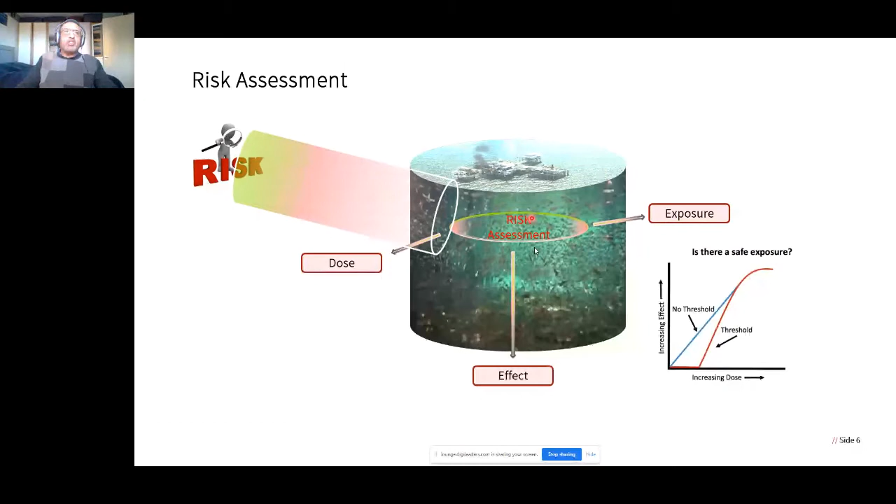The way to do this is to look at it in terms of a classic flow chart, and it applies not just to produced water, but to any risk - you could be talking about monetary or financial risk, the concept is the same. You have your data collection, you have the hazard - what is the hazard we're talking about? What's the exposure? And how do you assess the risk characterization?

For the hazard assessment, we have to identify the hazard - what is the risk source, and then look at the nature of this adverse effect. In terms of exposure, in this context it's the discharge and environmental interaction. Essentially what we're trying to establish is this probability - what is the probability of this risk taking place? To do that, we need to do the risk management, and then that needs to be monitored on a continuous basis. So that's kind of the crux of the risk assessment.

To say right at the outset, we use this concept of PEC-PNEC, a ratio of PEC to PNEC - predicted environmental concentration and predicted no effect concentration. Put simply, PEC is the concentration that's in the field, and PNEC is the concentration that we establish from the toxicity testing in the laboratory. The whole rationale behind this is that there are certain assumptions that we make, and this brings an element of conservatism, some speculation.

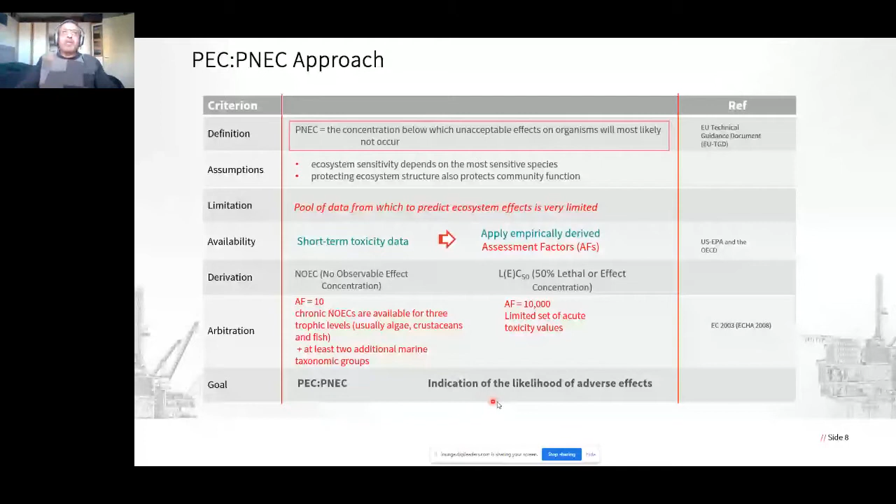The different steps relate to that flow chart I mentioned about hazard. Basically that's the data collection, and then we assess the hazard, and you'll see this when I show you some real examples.

The data collection involves looking at the chemical analysis of the produced water. Operators in the UK continental shelf are required to perform chemical analysis on produced water twice a year. So this is the data we use.

For toxicity, we use different trophic level species - we have microbial assays, algae, and crustaceans. So this is the hierarchy, if you like, and this is the process.

You'll see when I show an example what information we obtain. So we start with the produced water, do the tox testing, use the chemical analysis data, and then do some modeling that will tell us where the toxicity is coming from. And therefore you can have a risk management plan.

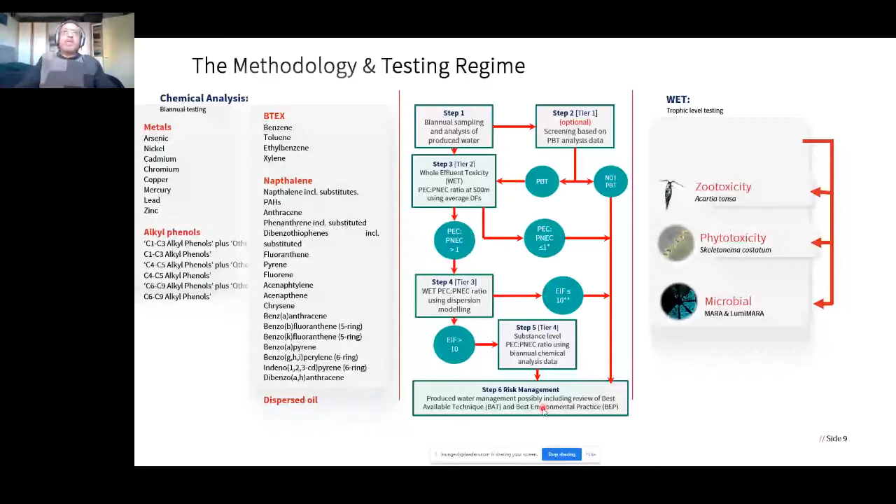From a global perspective, I'm based in the UK, and we're involved in the UK continental shelf, governed by the OSPAR regulations. For example, Norway is one of the other countries involved in this regulatory drive.

Further away you have Australia and the Far East, which have specific regulations. And then off the coast of Africa, for example, you have the Abidjan Convention, which comes into play.

My take-home message here is that there are these different regulations, and if you look at the specific information I've indicated, there are different concepts used. I showed you that flow diagram for how we make the assessment, and if you look at the particular data, you'll see the approach is different. The approach is different, so there is that disparity in terms of the different regulations globally, and that's what I'm trying to say.

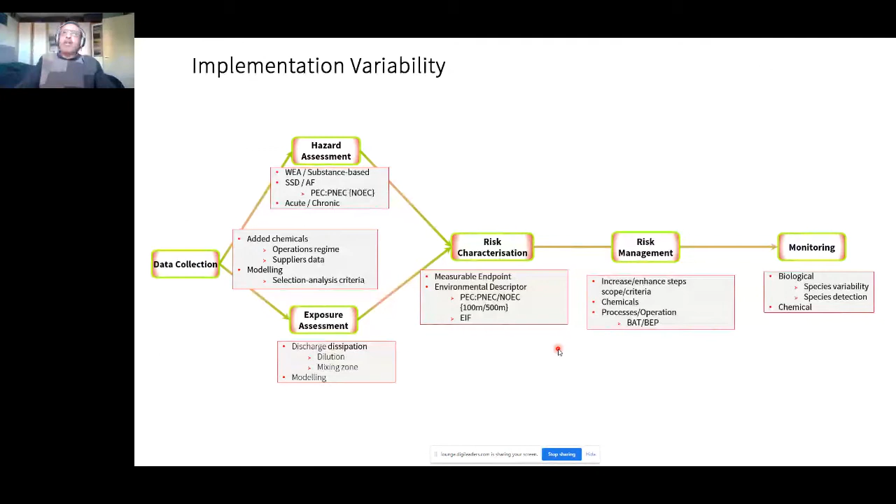The other thing to highlight is that we produce water in the oil and gas sector. The oil and gas regulations I talked about are obviously important, but here we're talking about chemicals. The whole idea of the risk-based approach is to look at the toxicity of chemicals, and you have chemical compliance regulations that are applicable globally, the most prominent being the REACH regulations.

So you have those two sets of regulations, the oil and gas regulations and the specific chemical regulations. The point I'd like to make is that there needs to be harmonization between these, and what you find is that this harmonization is not there at the moment. That's important to bear in mind - it will become more important that we make sure these are harmonized.

In order to carry out the risk-based assessment, certain aspects need to be in place regarding infrastructure. We have the regulations, and the regulator has to make sure these are adhered to - in most cases it's the Environment Agency in that region that takes care of that. You have the operators, the oil companies, who have to comply and verify and carry this out, and this is very much an international practice.

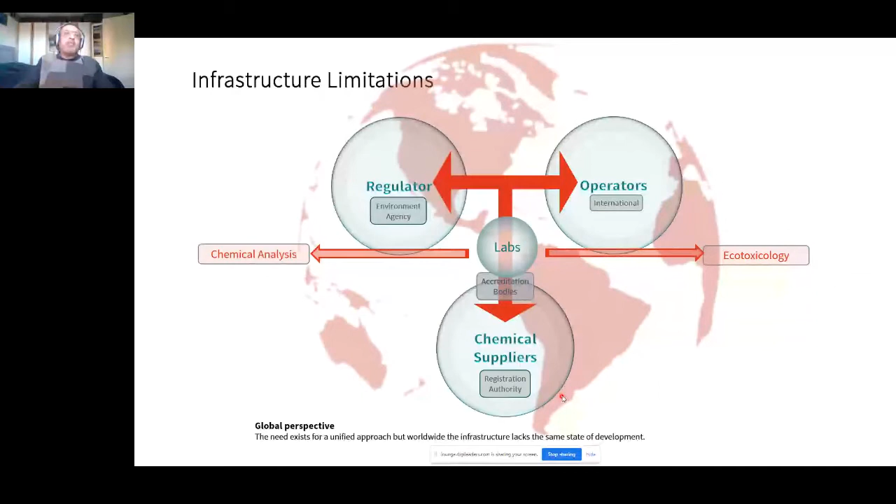If you look at the risk-based approach in terms of chronological development, this is very recent - that's the important message I'm trying to establish. Regulation came into play back in the 1960s, and it was quite basic - just looking at oil and gas discharge, end-of-pipe regulations. Over the years these have been modified and developed, mostly in the US and European regions, and you have specific OSPAR regulations that came into play.

There was more development as we see, as it progressed, for example, as in Nigeria. So it's been progressive, but it's very recent. That's kind of the message.

If you look at this risk-based approach, this has only come about in the first decade of the current century. And if you look at the UK RBA trial I mentioned, this only started back in 2012. In terms of the first cycle, we've finished the first phase, now we're in the interim phase, and 2023 is where the next phase will start.

There are other countries where this is now being practiced. So this risk-based approach is globally gathering momentum, but it's recent, and I guess it needs time to actually be practiced.

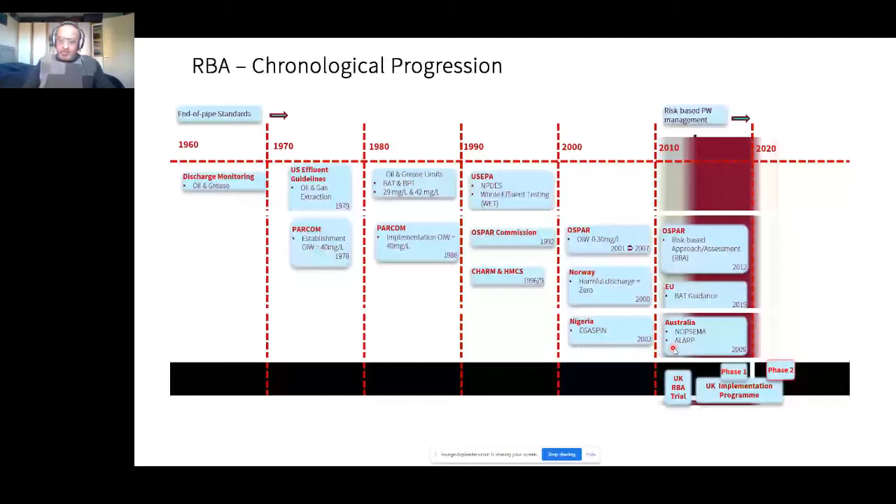We were commissioned by IOGP, the International Association of Oil and Gas Producers, to look at this globally in terms of the disparity I mentioned, and how you actually address this RBA. So we were involved in producing this guidance document.

It's in the public domain, report 633. Please do have a look at it. It's very important and useful, and we put a lot of information together about the disparity, but also how you can actually carry this out. So it goes a long way towards global unification.

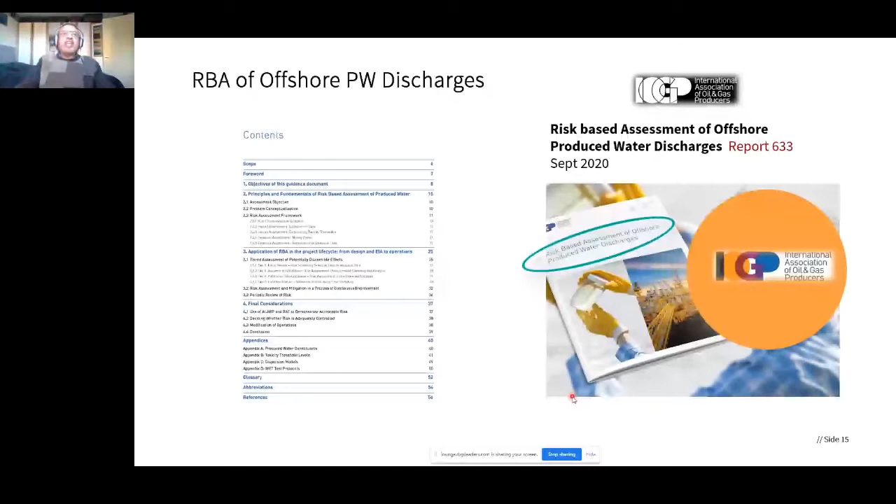I did say at the outset, examples in terms of how we actually do this, that stepwise process I mentioned: the modeling we do, the chemical analysis, the tox testing, the modeling. This example just shows you the outcome.

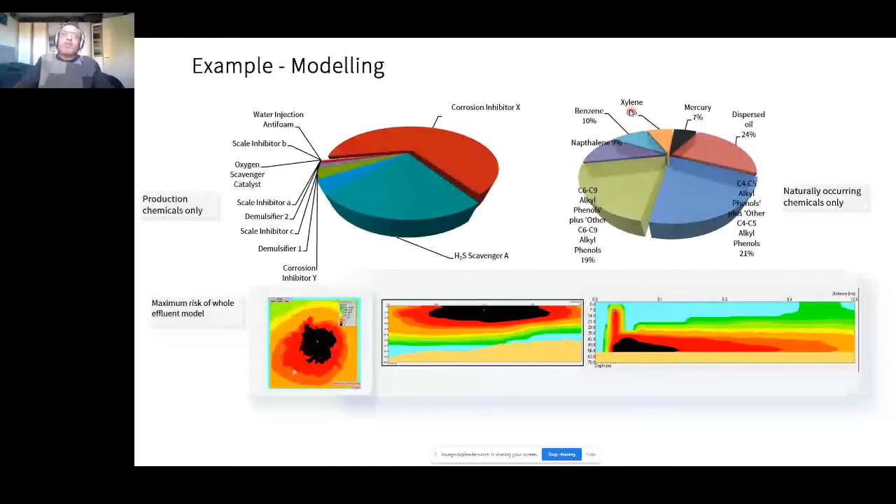What we can also do is look at the different chemicals present in the produced water. From the modeling, we can actually home in on where the toxicity is coming from. In this particular case study, a corrosion inhibitor was contributing the most to the toxicity, and we also had an H2S scavenger contributing. We can also look at naturally occurring chemicals, which come from the formation water below the seabed, and see which particular chemical is coming from those naturally occurring substances.

Hopefully that gives you an idea of the concept and what we actually obtain. This just shows it's a process, a dynamic process. On the UK continental shelf, we learned from lessons learned and modified the approach.

The two key parameters used in the assessment factor for the earlier steps I mentioned are the amount of produced water discharged, and to what depth you're discharging. We use these different assessment factors that we've derived. This was modified so that we introduced some more interim discharge volumes, so it gives a better representation.

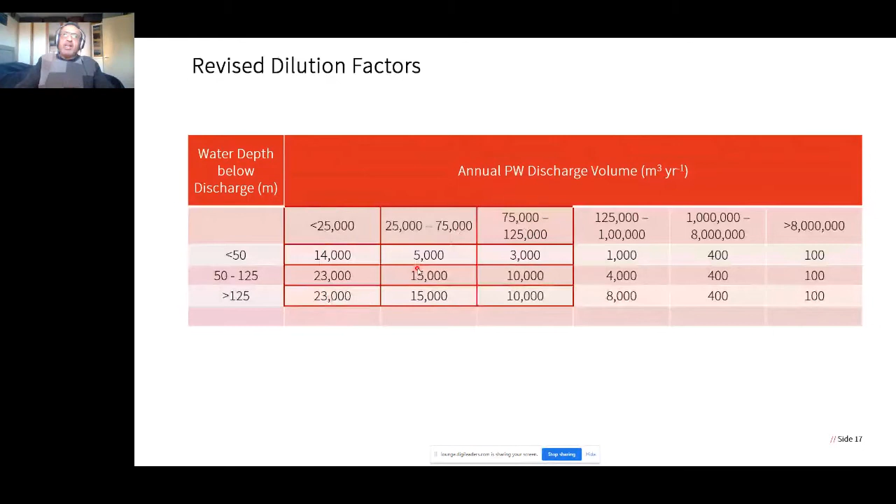The other thing we were able to do was look at the actual modeling that was done. For the most part, we've used this DREAM model, which is a proprietary model. There are other models available like CORMIX, MIKE, and development of other models that can be used to do this, to make it more accessible globally.

The other point to make is about different organisms and different tests that we use. You can see here that different organisms have different sensitivity to different produced water. So it's important that you actually use different test species. This is quite important from an ecotoxicological perspective.

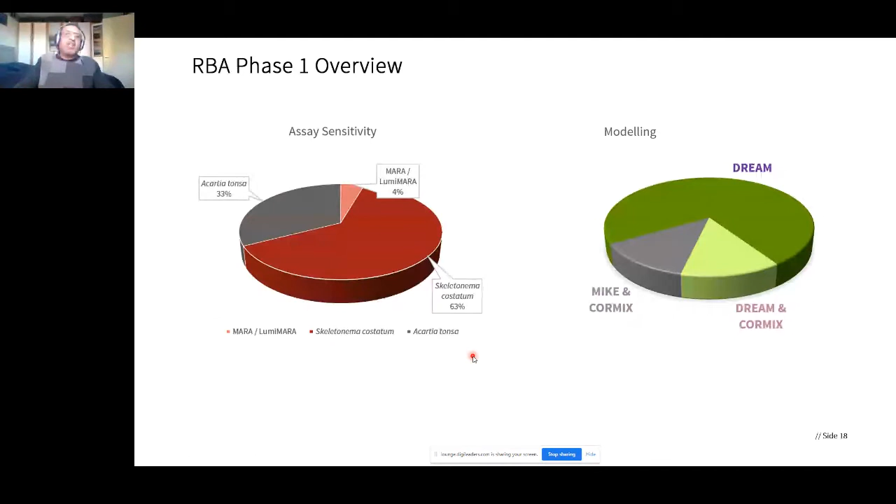One thing to mention is that when you look at production chemicals, they are actually made up of different components, and the amount of information available is very specific, so we end up making assumptions. For example, a production chemical will be made up of different components, and the information might indicate that one particular component is very toxic, but this component might only be a small percentage of the whole. Because of limited data available, we end up treating the whole product as though it's that single toxic component, and that creates an artificial impact.

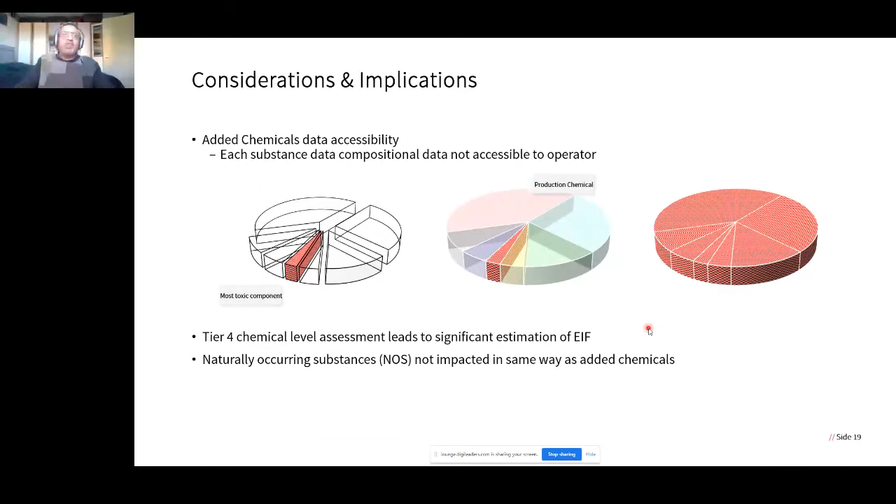This is good science, but it's not an exact science, and it's a little bit speculative. The other element of speculation is that when you use chemicals through the process, they actually partition between different phases - you have your oil phase, water phase, and gas phase. So those chemicals end up in different phases, but we make the assumption that all the chemical ends up in the produced water discharge. That will not actually be the case, so that's another assumption we make.

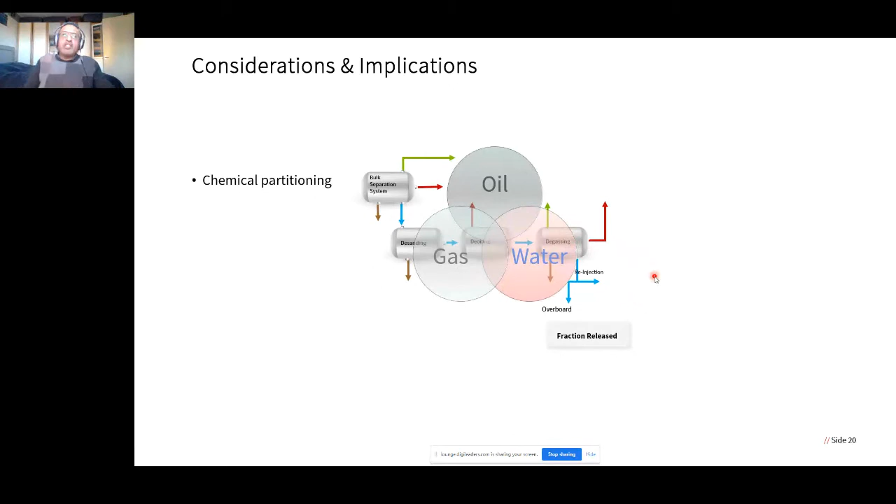We are looking into this through a working group, to see where the partition takes place and try to modify the approach. The other area where we want to improve the speculative aspect is to use different species and different types of tests, so we can reduce the assessment factor.

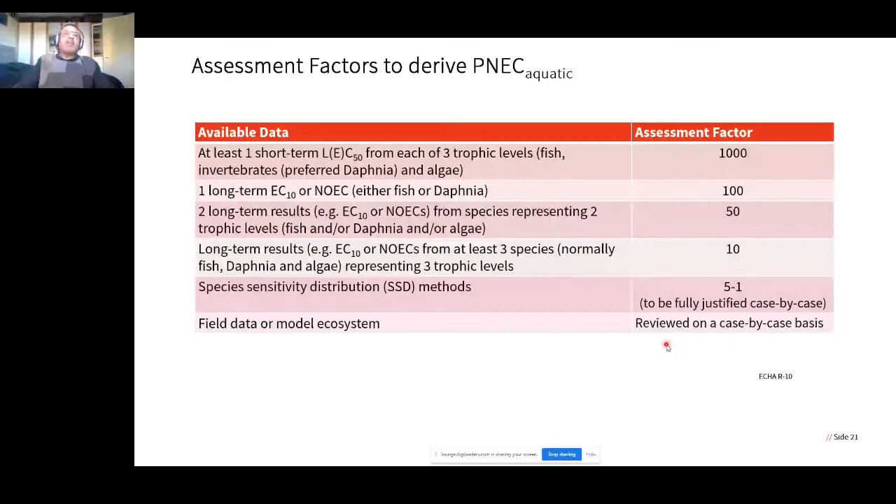We're advocating the use of chronic testing, and this is something we're actively looking at already. We're entering the second phase, where we'll be using chronic testing - these are more elaborate tests that will give us a better picture of the outcome. In the second phase for the UK, we have all these different operators, and these are all the different installations that in the coming years will have to carry out the RBA.

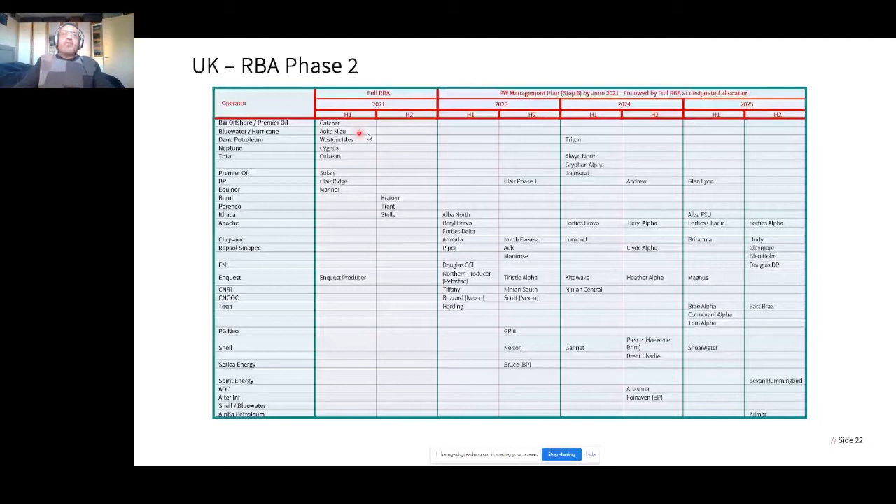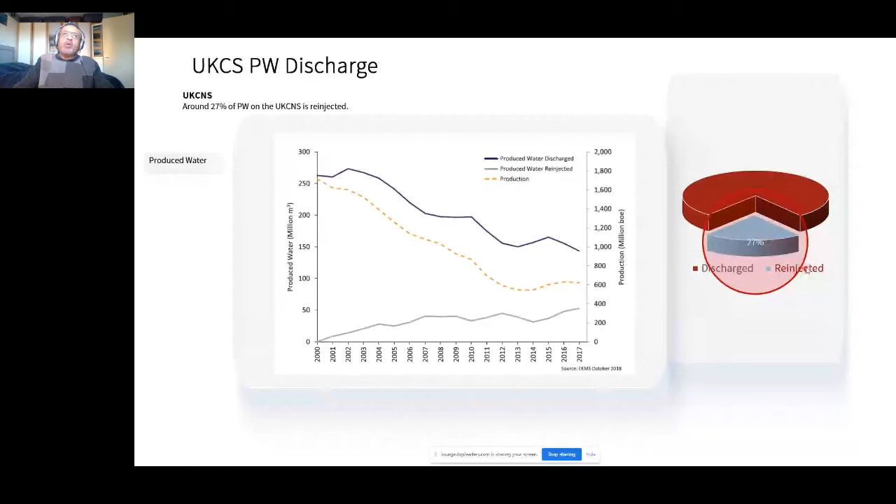The reason I say that is, in a study carried out in Norway, if you look at solutions to reduce the EIF and toxicity, there are different avenues - you might substitute the chemicals, or you might use reinjection. But the cost of reinjection for a lot of these different installations was pretty high - you're talking about millions, six-figure sums. So what I'm saying is that injection is not necessarily the answer.

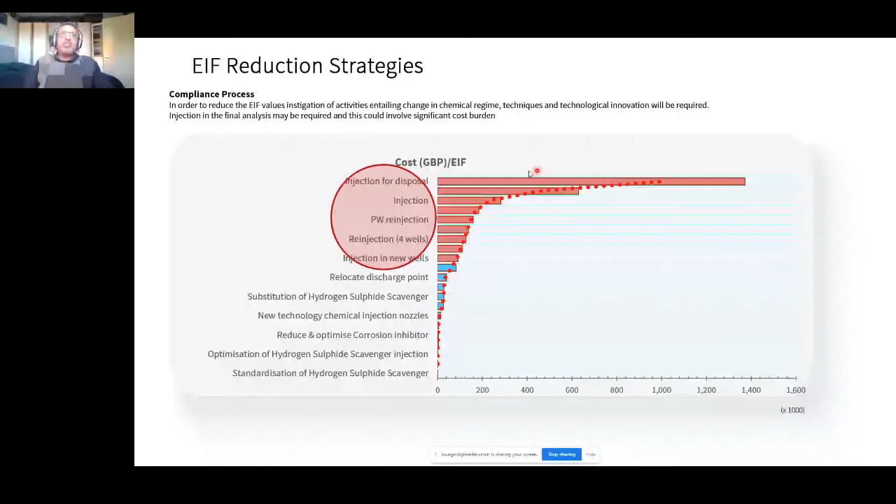You do need to do something about the toxicity of produced water, and although produced water discharge is going down, what we really need to do is look at what's actually in the produced water. You have different risk components - low risk, medium risk, and high risk components. What the regulator needs to do is make sure that it's these high risk components that are less and less discharged. So that is the recipe really in terms of reducing the impact.

So just to end this presentation, a final summary: you need to review the methodology used in the whole RBA process. I mentioned different tests - the assessment factor using chronic testing, chemical substitution, using chemicals which are less harmful to the environment, and improved water management strategies. Here we can use BAT, best available techniques, and best environmental practices. As I mentioned, there is tremendous disparity globally, so you need a unified approach globally.

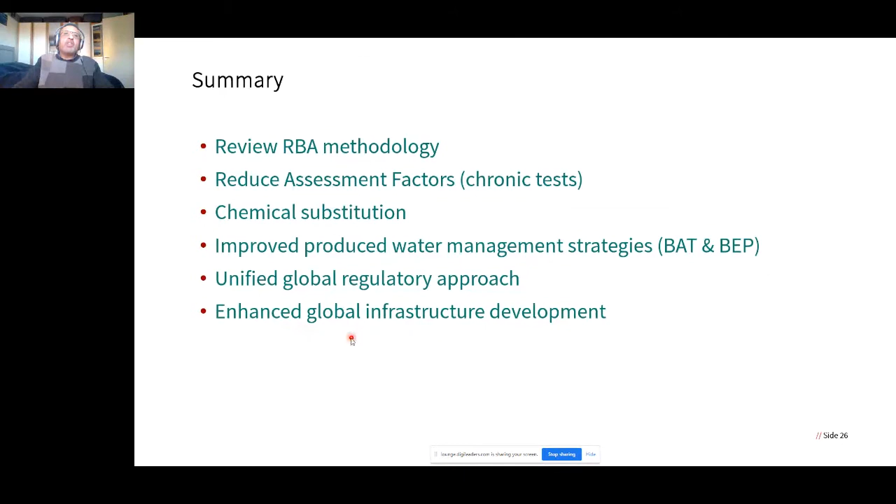And then, as I mentioned, the infrastructure in some places just does not exist. So we need to make sure that globally we address this. We have a unified global approach to actually improving the infrastructure. And that's the end of my slide.

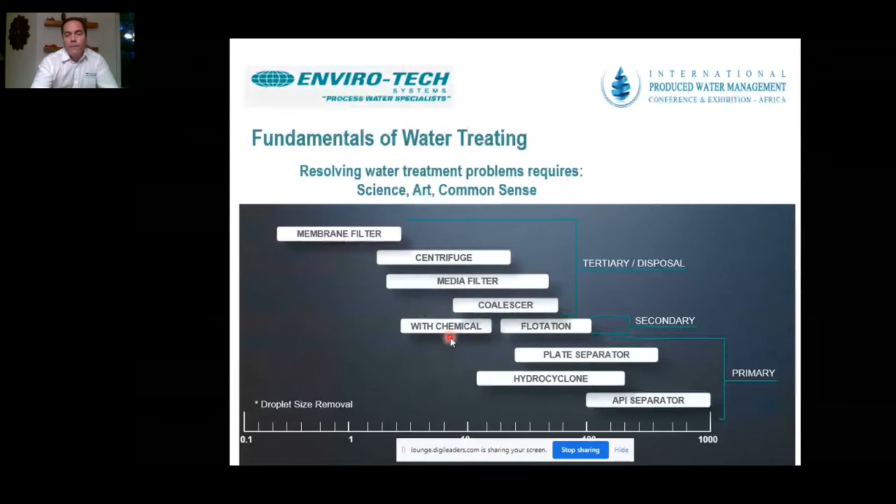Filters can also be used as an assurance if you have an upset condition where treatment was not done properly in the first or second stage. You can always use the media filter to give a performance guarantee to the customer before you discharge overboard or reuse.

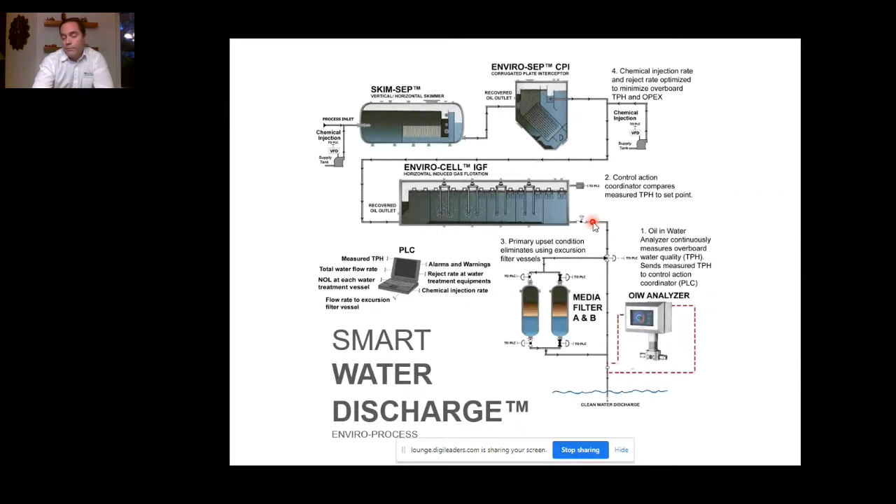On this slide, I'm showing the oil in water analyzer installed at the end of the treatment package, but we can also install them at various stages of the produced water treatment package to confirm good performance of the equipment. We can install one downstream of the skimmer, or a couple of analyzers in front of and downstream of the IGF. So all projects are a bit different, and customers sometimes require a better understanding of their process.

These analyzers complement very well the equipment we provide customers at Enviro-Tech, regardless of whether it's first stage or second stage treatment. They come in various styles - here I've got a probe style analyzer on the left, or a side stream analyzer on the right.

If you have a new installation or want a better, more accurate inline measurement, the probe analyzer may be best. If you don't have the flexibility and your existing installation cannot be adapted with a probe, we can also provide the side stream analyzer, shown on the right.

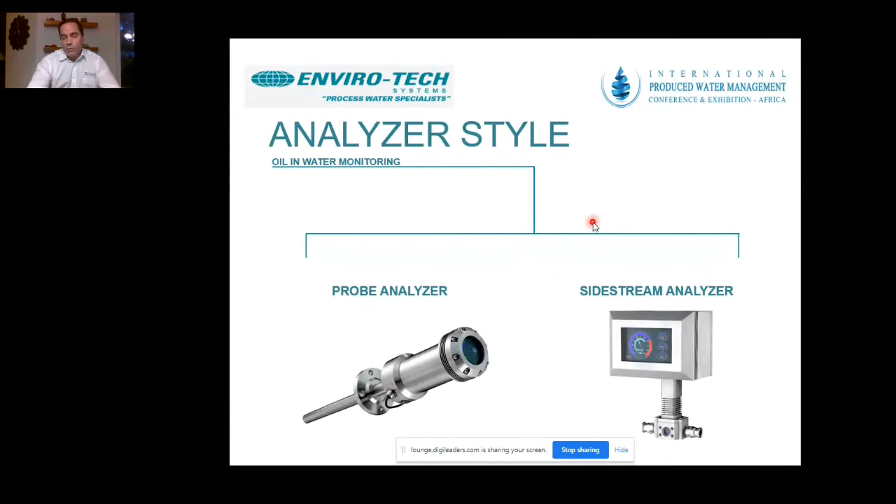This is useful for the operator to make sure everything's okay, use it in his lab, and correlate with the other inline results.

Over the years and decades, oil in water analyzers have evolved quite a bit. They are much more reliable, can keep themselves clean, and are meant to operate in a harsh environment like we have in the oil and gas industry, offshore and onshore.

These equipment also have very high performance. They can give you very accurate measurement and real-time information with readings every second, so you have real-time information coming to the DCS or to the customer's control room.

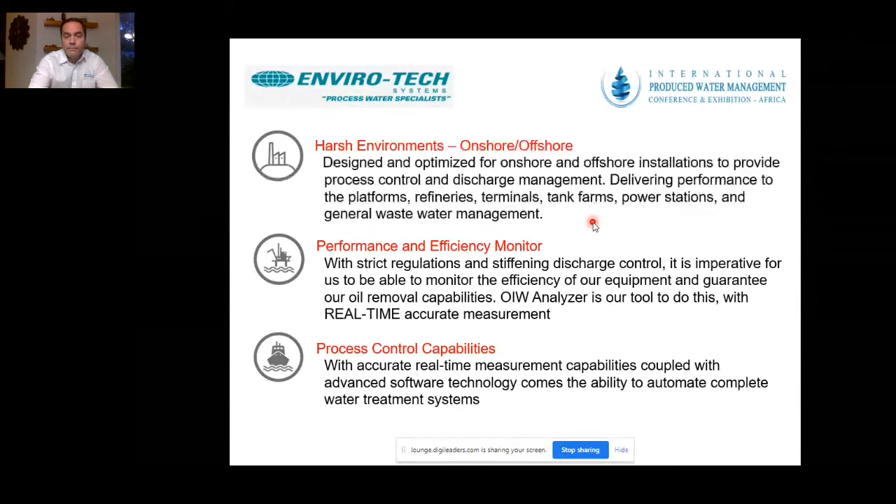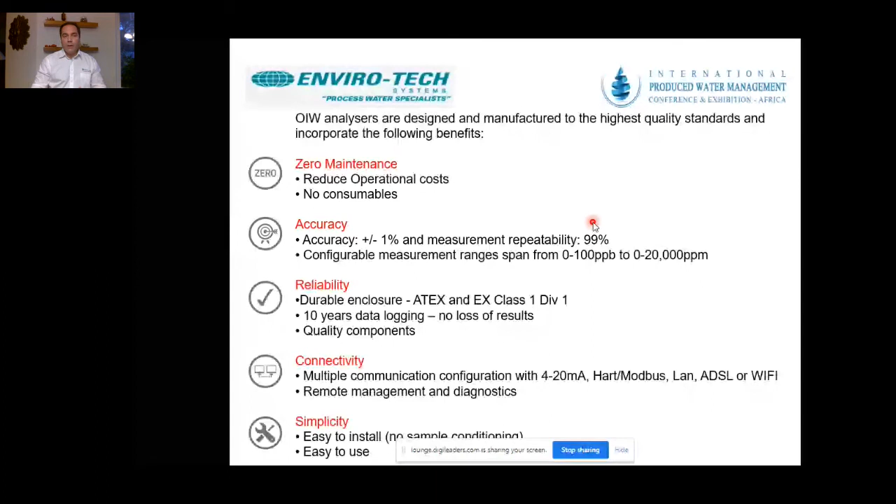These analyzers that we have are robust. They can operate on their own without any assistance, and they can also clean themselves - that's why I'm showing here zero maintenance or very little maintenance. Operators don't need to clean these analyzers constantly to get the accurate readings they need.

Accuracy is very accurate, within plus or minus 1% of the measurable range. Very reliable - we have explosion-proof analyzers if required. It also has various connectivity possibilities with the customer's DCS system: 4-20 milliamp, HART protocol or Modbus protocol, and also Wi-Fi and Ethernet.

Nowadays, these analyzers are really easy to operate. There's very little intervention - once it's commissioned, running, and calibrated, it will keep reading properly with minor tweaks if required when we correlate with the lab, but they clean themselves and require very little attention.

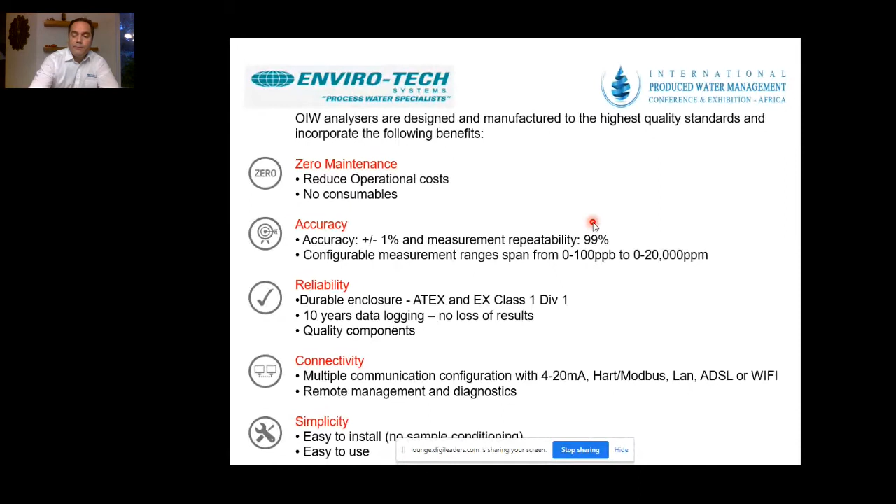The analyzers we provide have various technology that has evolved through the decades: ultrasonic cleaning device, fluorescence or laser-induced fluorescence technology, video microscopy if required for further analysis if the customer is more interested in water analysis instead of just the ppm level, and also spectrometry if you want to recognize different types of oils introduced in your produced water if there's interference with chemicals. Using the spectrometer allows you to avoid some of the challenges of using laser-induced fluorescence.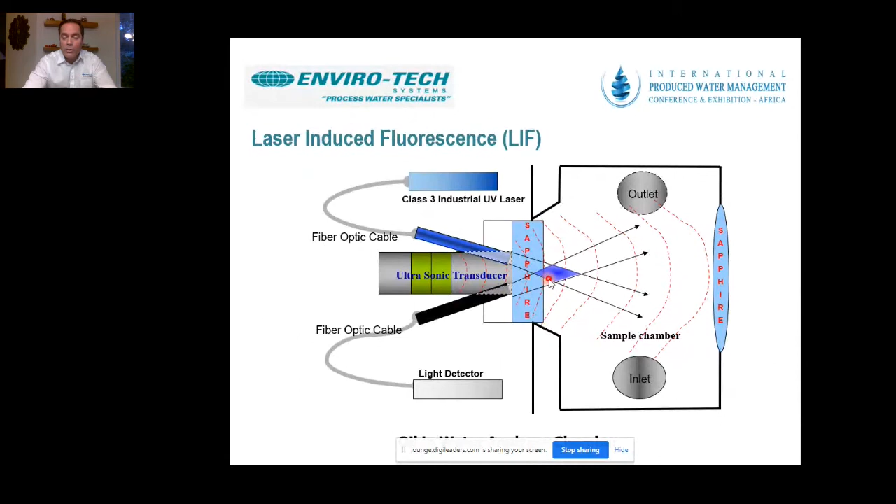So this is basically the technology of laser-induced fluorescence. You use a specific light source, like a laser or UV light. You excite the hydrocarbons, and the measurement of that fluorescence is then converted into a ppm, making sure that we did a proper calibration. That is an important step to have accurate measurement, before you commission the analyzer.

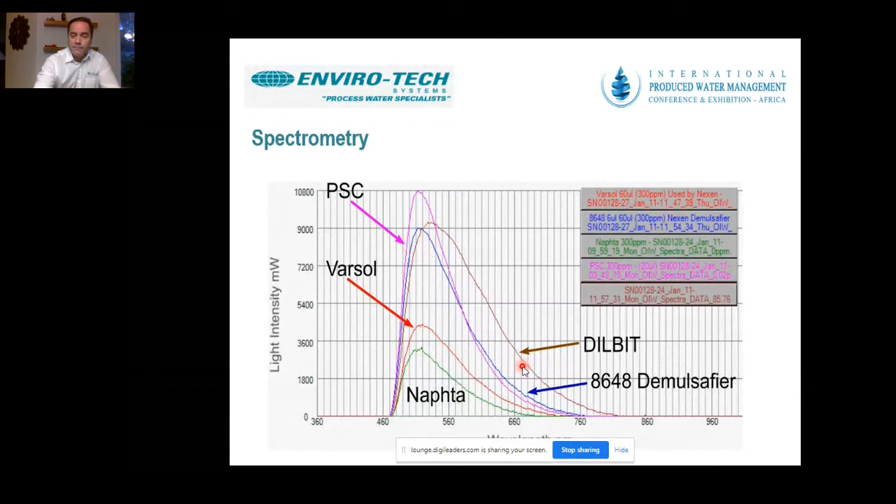Here's another technology we use in our oil and water analyzer. Sometimes customers require troubleshooting of their existing process, and knowing the ppm level of oil in the water is important. But when you have limitations on your equipment and you're not achieving the results you want, sometimes it could be a revision to your chemical treatment plan. Sometimes you have issues with your oil droplet size being too small, so the equipment is not achieving the performance.

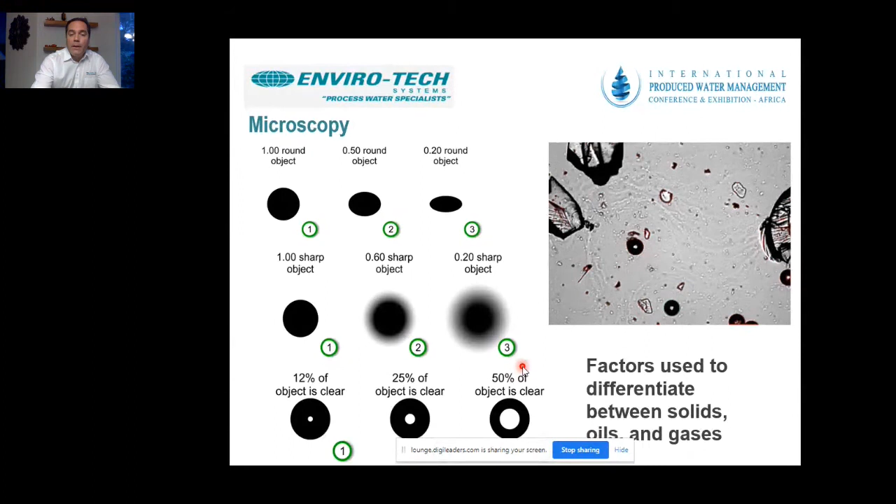You have different features to tweak to make sure it is properly calibrated to recognize a round shape, which would be an oil droplet, an irregular shape, which would be a particle, and a round shape with a donut inside, which would be recognized as a gas bubble. All of these can be adjusted through the software, and at the end of the day you have a series of pictures with the software recognizing the particles, oil droplets, and gas bubbles.

And you can have an accurate oil droplet size distribution, or also a TSS content with a particle size distribution. You can further analyze it in the lab to make sure that if there's an issue with the oil droplet size, you can address it with maybe a revision to your chemical treatment upstream. So that gives the customer the ability to understand the process more than just using laser-induced fluorescence.

Our analyzers have the ability to self-clean themselves. You can adjust the frequency at which they are operating. You can also adjust depending on the temperature of the process and the pressure in the line. The ultrasonic device can be tweaked to operate at different frequencies, and you can also adjust the intensity to be stronger or less strong to dislodge any impurities.

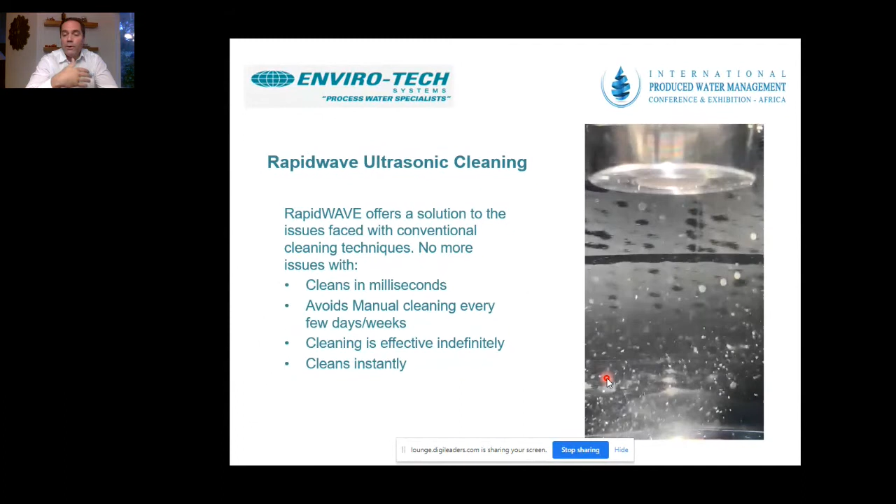This demonstration shows the extreme condition where you ramp up the power to its maximum, showing how the ultrasonic operates. You convert electrical energy into mechanical transfer all the way to the tip of the probe to create cavitation in the water. This cavitation, which has gas bubbles, will scrub the lens and make sure no impurities have the ability to stick to it. Keeping this lens clean all the time gives you accurate measurement and avoids operators from constantly removing the probe to clean it.

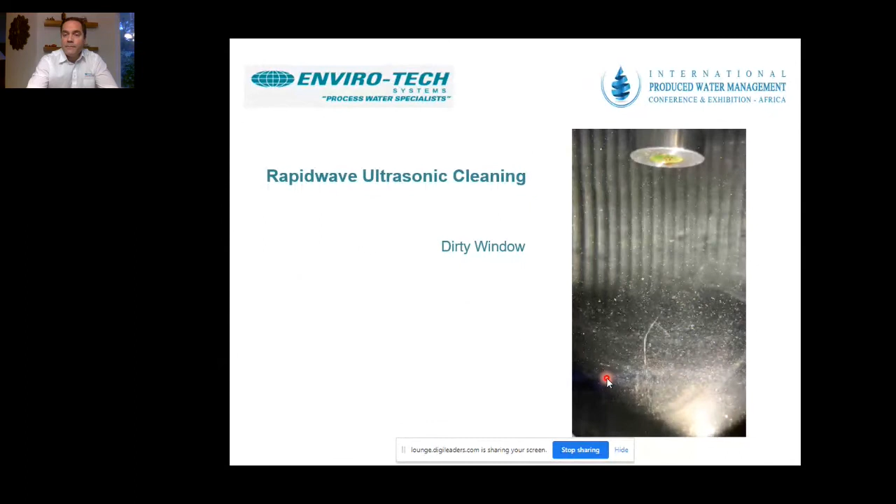So very, very important. Our analyzers now, and for a long time, have had this ability, and that has shifted the general perception and attitude from operators and everyone involved on the advantages of using analyzers today, to give you accurate measurement continuously with minimum maintenance for everyone involved in operating this analyzer. That's what I wanted to share with you.

So I wanted to share with you the advantages of the oil and water analyzer, not only for the operators, but also for a company like Enviro-Tech, where we have a multitude of equipment where you want to make sure it is operating within its specific range, and you're not having any issues or concerns that might be related to water analysis problems impacting your overall performance.

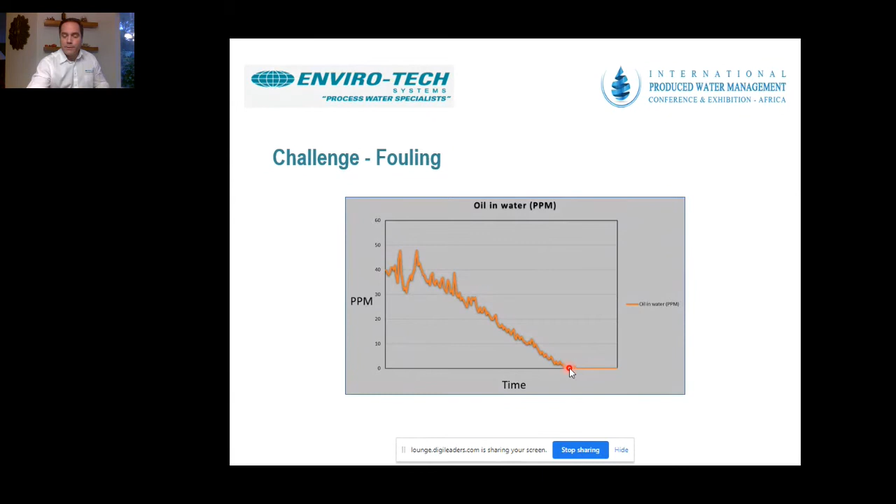So this completes my presentation. I'm ready to answer any questions if you have them.

Thank you, Jean-Marc, it's an amazing presentation. I think the focus is direct. This is a solution, as a solution provider, as an OEM in the industry. We are fully aware of your expertise and the depth of Enviro-Tech in the industry globally. We are not surprised with the presentation - it's quite precise, distinct, and focused. You'll be privileged to know that there's a lot of challenge in the African continental shelves, especially the oil producing companies, they have lots of challenges with oil and water and all that.

Nope. How about now? We can see them. Yeah, now you can see the slides. Great, okay, and the complete slide. We haven't got it in presenter view yet. Okay, so it's in presenter view, so we can see the notes. Yeah, it's acting strange, huh? Okay, so if you go back to that screen, there should be a button where you can swap that one. There we go. All right, very good. Thanks for the help, Lucy.

So as I was saying, I definitely got very ambitious with what I wanted to talk about today. Initially, I really wanted to talk about sustainability, recycle, reuse, and some of the things that are more trending right now from an ESG standpoint. But in talking to most of you on the call now, and some who unfortunately couldn't join today but will join later, the importance of some of the basics, the foundations of produced water treatment, really from a primary and secondary standpoint, not getting into the tertiary world that Jean-Marc had just mentioned.

But a lot of what we do at Exterran is on that further secondary, tertiary treatment standpoint. One of our newer product lines added in the last couple of years has been more in the primary, secondary stage. That's some of the products I brought along with me from the company I was with previously. Some of the IP acquired over the years for hydrocyclones, both for desanding and deoiling, have come along with me. So a lot of what I'll be talking about is based on that technology on the front end, and then on the back end I'm going to try to make more room for the original topic I had in mind.

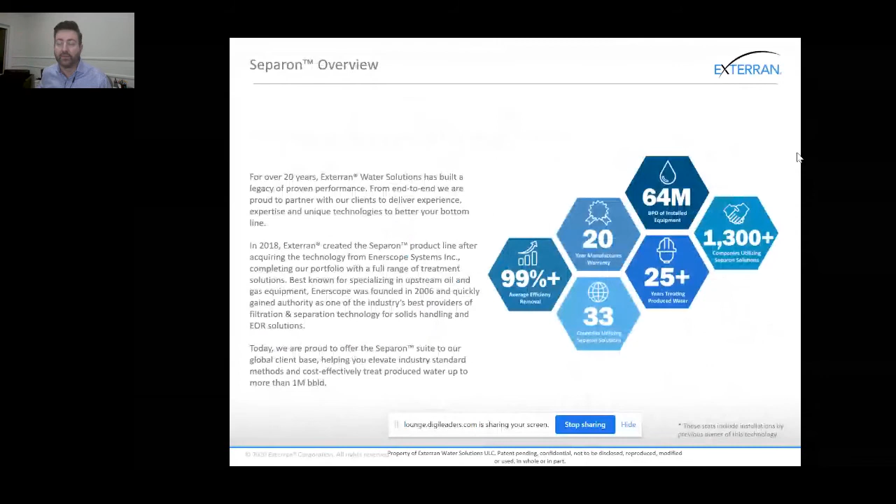And as you can see, with these products I'm talking about, this small handful of products, we have about 64 million barrels of installed product on the ground working today. So a fair number of primary and secondary treatment products available to you in the market.

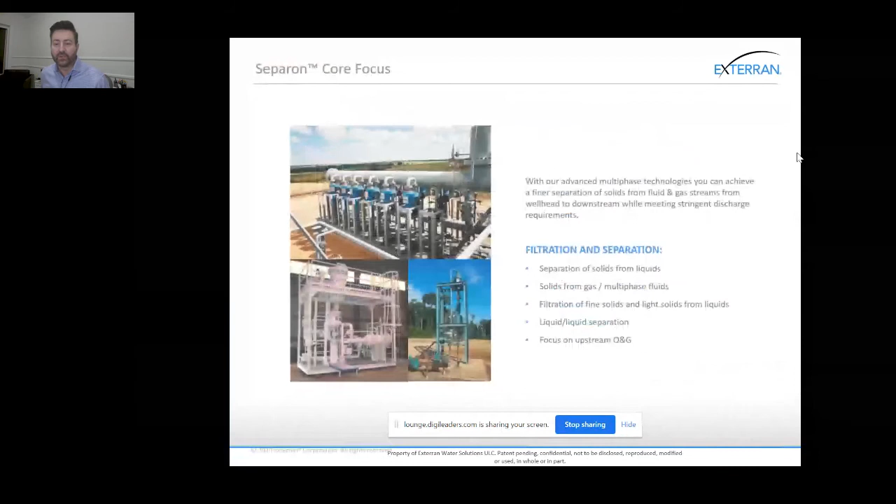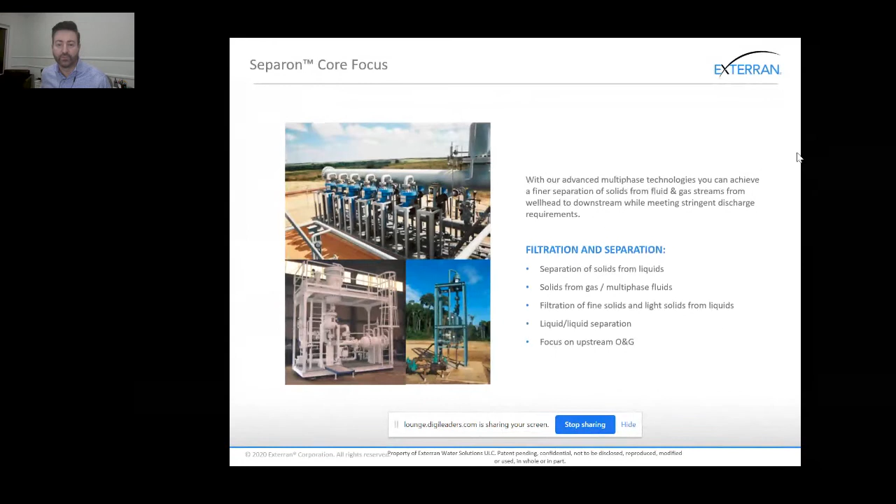A lot of what we do is basic, traditional produced water treatment, but some of it's a little bit outside of the typical produced water range, which would be a multi-phase application, whether at the wellhead or well stream, or a complete gas application maybe with a bit of condensate. So from the desanding aspect, it could be a wide range of applications. On the liquid end, typically it's more of a traditional produced water application in the upstream market. We have a little bit of a footprint in the midstream market. We haven't done much in the downstream market, although the technology is used there, but that hasn't been our focus for now, and our potential focus for the future would be more on the upstream market and integration of systems.

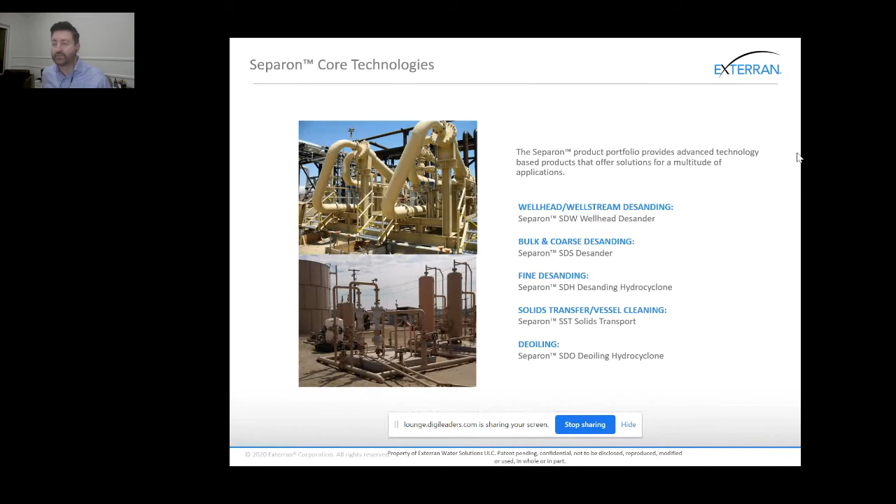So I'm going to talk about really just 3 or 4 of these products — again, well established in the marketplace, utilized in the oil field, both onshore, offshore, conventional, unconventional type of products in market sectors.

The typical applications we'll see are primarily produced water reinjection or secondary recovery. Probably second most common would be ahead of any sort of tank, whether that be a free water knockout, GOSP, or production separator. And then probably the third most common application, excluding wellhead desanding applications, would be pretreatment.

Whether that be pretreatment for a liquid-liquid device, a flotation device, a coalescing device, or some other tertiary device, or ahead of a finer solid removal device, there's a wide range of possibilities there.

A lot of what we do is brownfield, going back in and taking a look at more mature fields where there's sand where there wasn't sand before, or where water volumes have increased due to maturing fields. So there's a lot of opportunities to take a look at old technology in new ways.

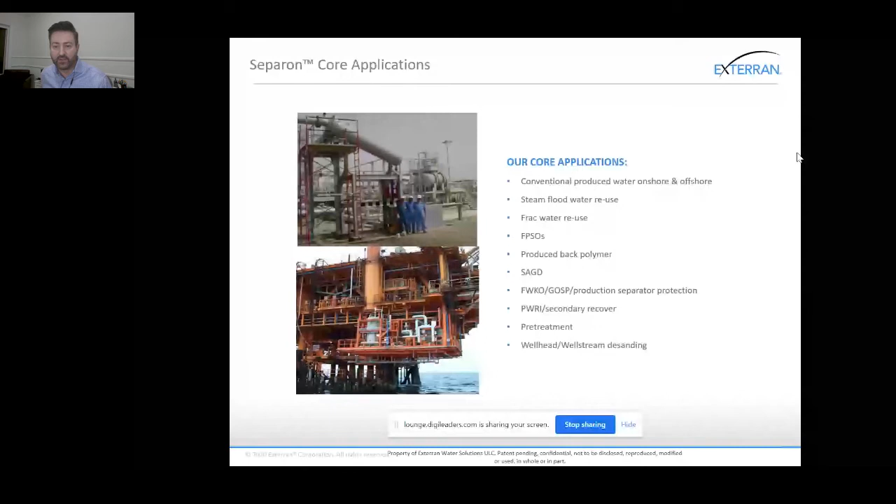One of our workhorses is this SDH device, made with a very robust reaction-bonded silicon carbide for longer life of the liners. This design also gives you a bit more volumetric throughput, and of course best available technology from an efficiency standpoint with lower pressure drop.

Our new sustainability reports are coming out, where we address a lot of our carbon footprint and impact with some of these products. I'm very excited about what we're doing with it this year, and we'll be able to publish next month. So some interesting, exciting things to come.

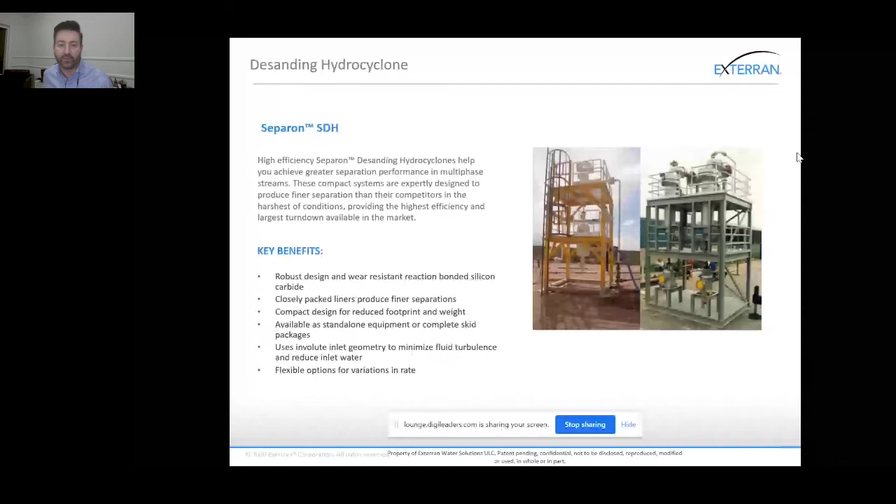A lot of these products are used in conjunction with onshore and offshore applications for a wide range of API oils, whether it be 8 API or 40 API oil, and a range of temperatures and pressures.

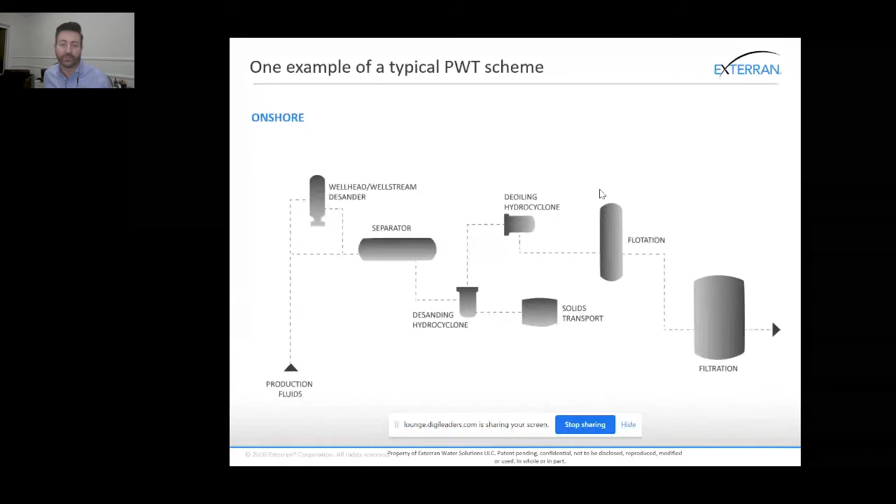Again, just more of what I was talking about, some of the key applications. All of these are based on Stokes' law, and there's really no way to get around this. There's no tricking Stokes' law.

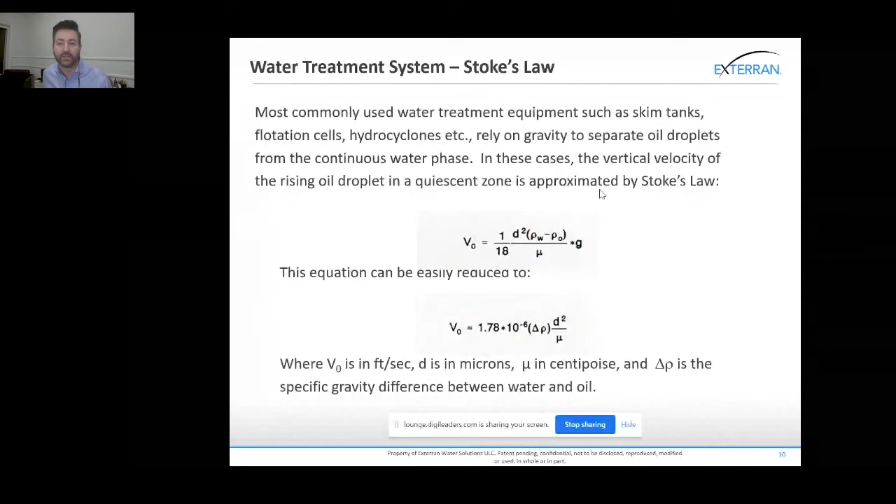It relies on gravity to separate, and some of the key factors we're going to be looking at would be the droplet size, obviously the temperature, and of course the density difference between the liquid phases.

These factors can have a major impact on performance, especially in areas like the desert where there's a wide range of temperatures, or in a mature oil field, or where some processes need to be improved upon, maybe where there's some shearing of oil droplets.

There are ways that we can not only monitor but improve performance based on using technologies available today, just like Jean-Marc was mentioning with the analyzer and monitor.

A lot of these technologies are already used to enhance and increase performance of the existing equipment and process conditions, but also in evaluating basically the process conditions for picking the best type of solution or product for the application.

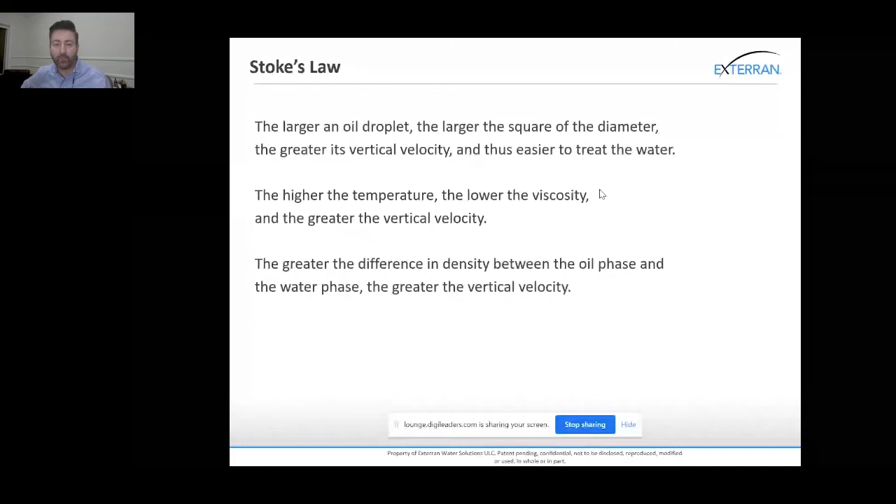Again, a wide range of products. Typically, we look at some micron sizes in most cases to break it down by certain levels by size. Just to give you an idea, human hair is somewhere in the 40 to 50 micron range, and that's also about the same size the human eye can see, assuming you have good eyesight.

And then, in the 5 to 10 range, or maybe 12 micron range, would be your white and red blood cells respectively, to give you an idea for sizing. So typically, your primary and secondary separation and filtration will be in that 15 to 150 micron range for the most part.

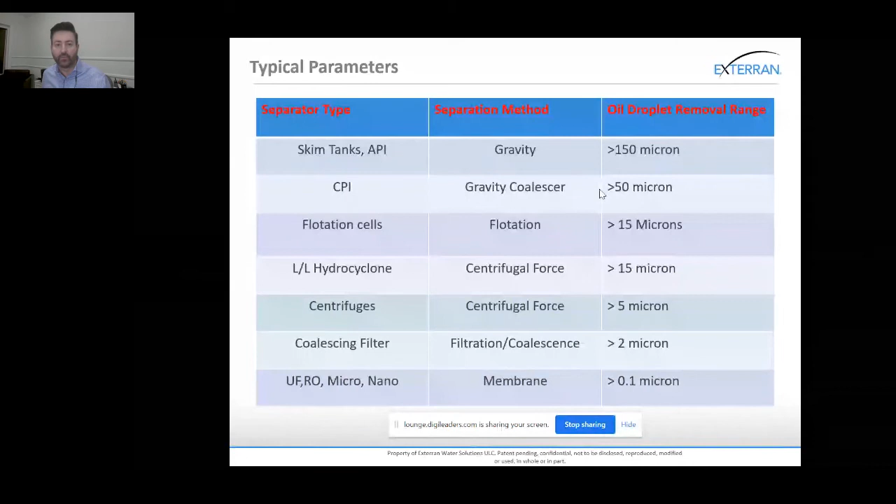Again, just to wrap up, our focus really with these more mature products has been to offer a proven technology that offers benefits like smaller footprint, more volumetric throughput, and higher efficiencies. We've focused a lot on cost reduction over the years. I think we're now looking at something that's a fraction of the price it used to be.

If you went back 20 years, the technology, just like many of the devices we use today, the cost has come down over the decades. So that's been a big focus of ours. And then, of course, how to best and where best to apply the technology is key to the success of any technology.

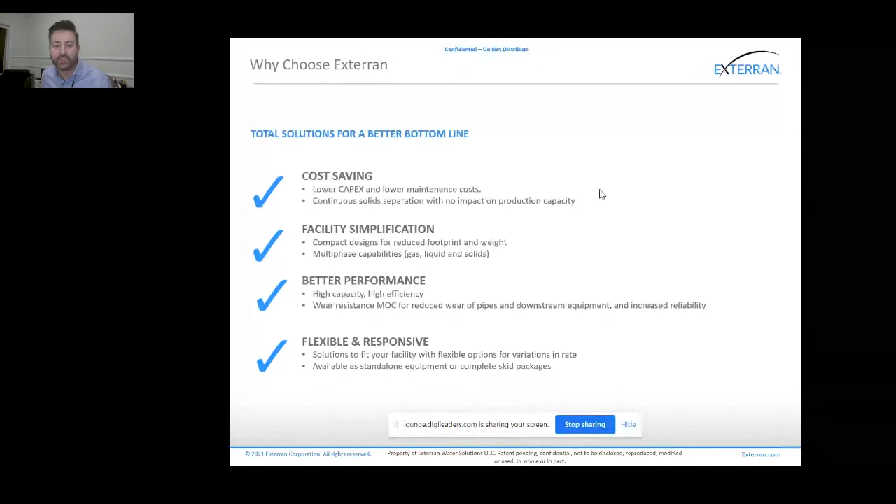I'm going to switch gears real quickly here. I believe one of the things I wanted to do with this talk originally was talk about how to make some better decisions for produced water management and treatment, with sustainability in mind.

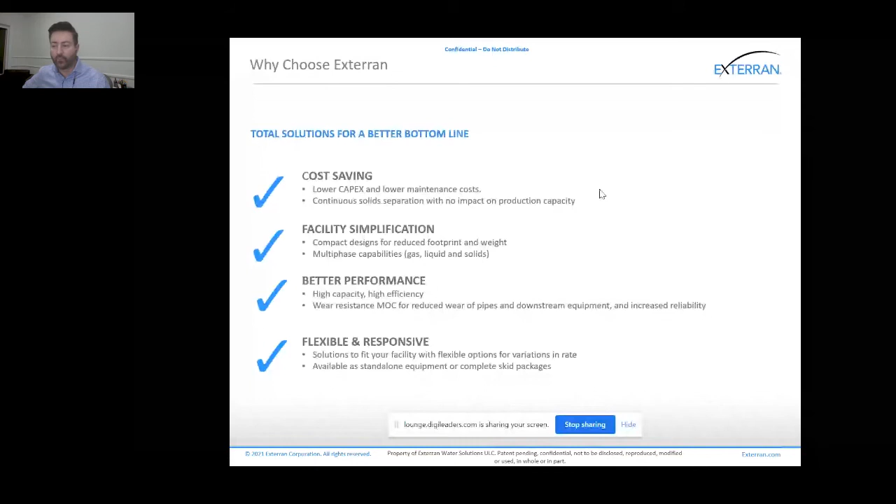A lot of what we've been talking about this past year has been a crystal ball for where we're going with oil in general, but water tends to follow the trend closely, with one caveat: as fields start to mature, you start to have more and more water that comes along with the oil. So these numbers, assuming oil volumes stay the same, will increase.

Some of the numbers quoted for 2023 are up in the range of about 340 billion barrels per year, which is a dramatic increase from where we're at now, which is probably why the number I like to typically use instead of the 210 billion number is the average water-to-oil ratio.

Usually for a conventional application, you're somewhere in the 3 to 22 to 1 range. A lot of people use 5 to 1, some use 8 to 1. It really has to do with where you're located, the maturity of the fields, and the type of operation you have. So there are definitely some impacts there.

But definitely the volumes we're talking about are enormous. We can make a huge impact here with smarter decisions, and moreover, changing the mindset. I think that's going to be very key. In the past, we've dealt with produced water, or considered it a problem or an issue to deal with.

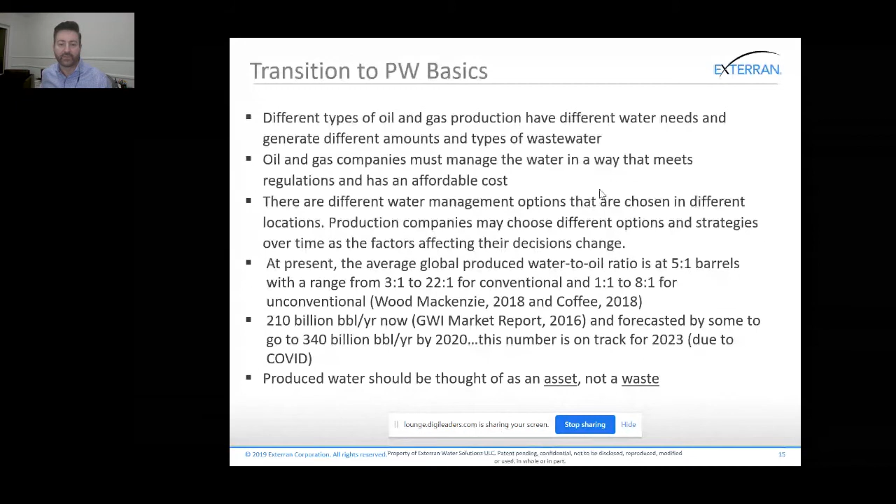We really need to think of it as an asset, a valuable resource, and not a waste. If we're able to make these changes, the only way to utilize a resource is to give it some value. I've been told on various occasions that water is free and unlimited. That's going to be far from the truth. Again, those are some of the bigger mindset battles we have to challenge in the years ahead.

But I do see a lot of changes. I think there's some focus not only on fit-for-purpose reuse, but also beneficial reuse, like Dr. Alexandros spoke about with the reed bed application in Oman earlier today. That's a good example of how you can utilize large volumes of produced water that normally would be disposed of, wasted, stored at a very high cost, or possibly treated and reused, but only to a certain extent.

I think there are some very innovative things we could take a look at for beneficial reuse. And then there's a whole element of desalination, but I won't get into that right now. I also probably won't delve into the unconventional market too much, the shale play and the heavy oil.

But again, those are all great possibilities for improvement. And I think some of the things stopping us are, besides the pandemic, the oil price. Obviously, I think when it's a stable price, things happen. When it's too low, people put the brakes on.

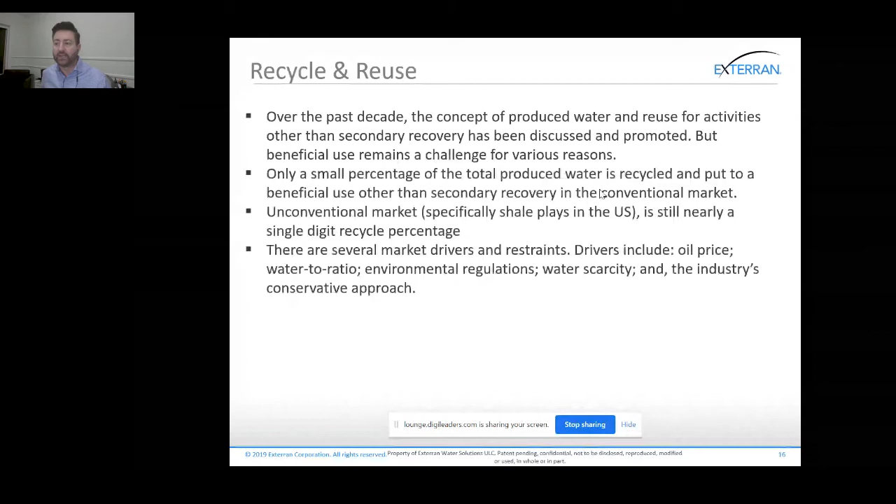I think a lot of it has to do with, quite frankly, we like to do what we've done before. So doing anything different or new is not going to be very favorable. We tend to repeat what we've done in the past, so that's a trend we have to change.

Also, I think a lot of what we look at is what's the cheapest, and usually it's the cheapest today. We need to make better decisions, not only looking at CapEx but OpEx, and maybe more of a longer range, not just a quarterly or annual snapshot. We need to take a look at a 5-year, 10-year, or maybe even 20-year cost outlook to better make financial and sustainable decisions.

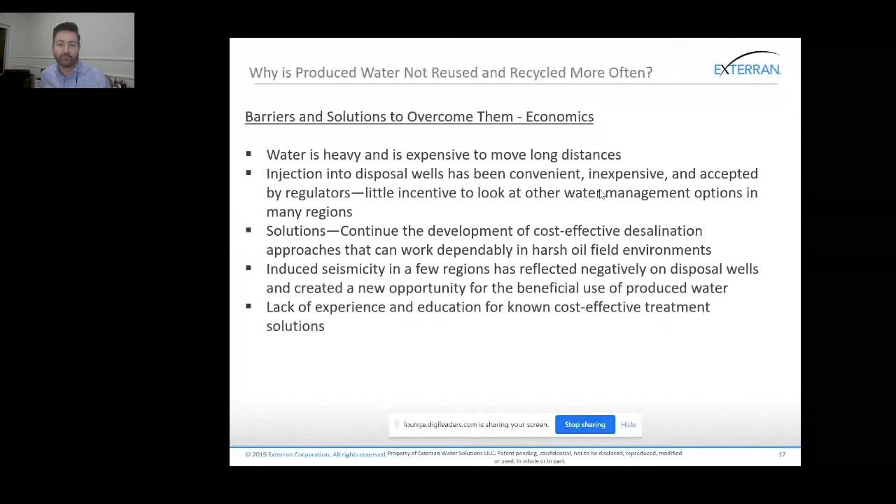Policy and regulation will come into place again—the legality of who owns the water, what they're responsible for, who's counting the number and constituents in the produced water. All these are factors that can work against us. But if you change your mindset, I think it can work in our favor for increasing chances for recycle and reuse.

Looking at the overall big picture, the characteristics of your fluid really need to be looked at first to better determine the equipment, the process configuration, and the chemical treatment program you're going to use, and really how the product and your operation is put into play. If you don't take all these different areas into consideration and only look at one factor, you'll be missing out on the overall design process.

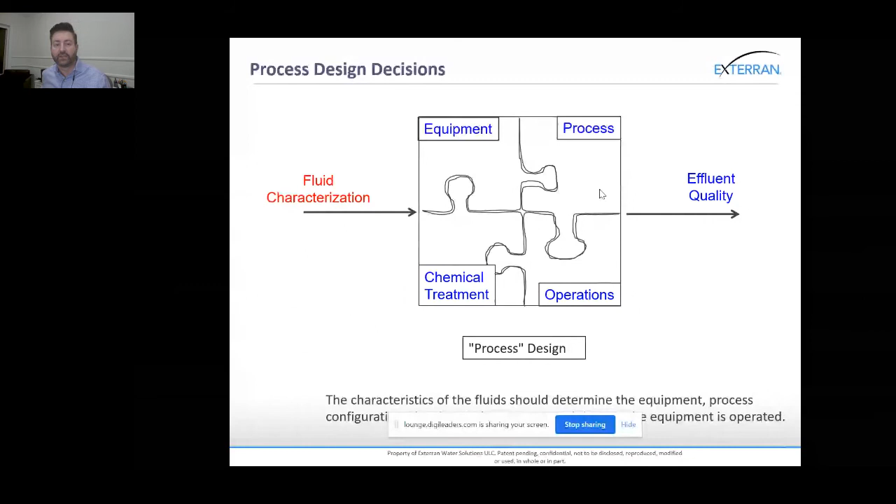That also comes into play with many different types of groups—multidisciplinary teams that need to be involved. It's not just the reservoir engineer telling you that you need 10 micron or 5 micron performance at X ppm, and it may not just be the health and safety person talking about one aspect. It's a multitude of disciplines that really need to be looked at, and not only the different disciplines, but also the life cycle of the water—from the source to the treatment to reuse to storage to transfer, moving it from point A to point B.

What you're going to do if you reuse it, or if you don't reuse it—how to dispose of it properly and economically, and is there a way to maybe store it temporarily? But typically it's called disposal because more than likely it's not being stored, it's being disposed truly. So I do think that life cycle of the water has to be really looked at.

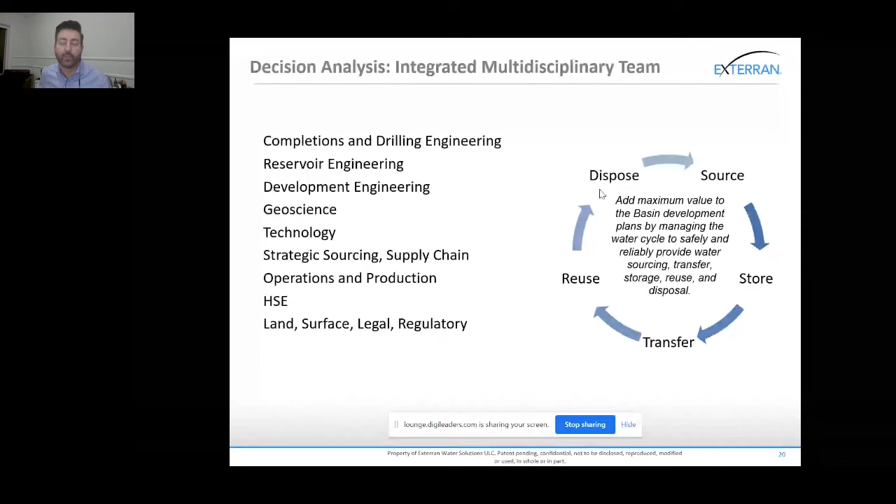So looking forward at some of the things we can do and should be thinking about when we look at sustainability—obviously, anything we're doing should not pose a safety risk. There's been a lot of talk about more cost-effective ways to come up with solutions. The products I talked about at the beginning of this presentation were old products and technologies, but they're a good fit for the application. So looking at fit for purpose, and where things have been traditionally used, assuming they work, is important.

I know everybody's excited about new technologies—I am as well. But some of the old technologies have a good place in solving problems.

I do think a lot of what we're looking at for the future will be based on collaborative efforts. One of the reasons I spend a lot of time talking to various types of people in different organizations and events like this is that the only way to really solve the problem is to talk with others and share success stories. If we're not able to learn from others' mistakes or lessons learned, we're missing out there.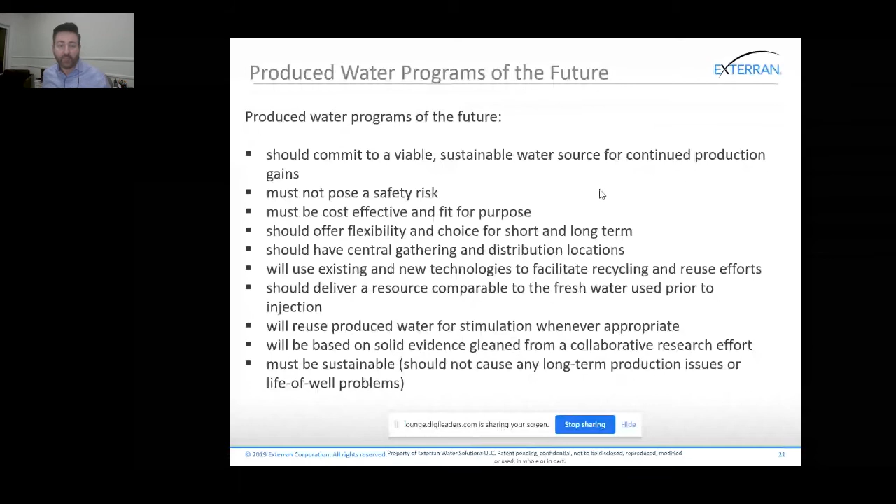There's an amazing amount of information that we're not really capturing, monitoring, or analyzing that we could be today. So I think utilizing information that's available, or using technology that's available to do that, is going to be key. I'm not just talking about big data and IoT, but anything you can do for remote monitoring or visualization will be helpful in making better decisions, especially when it comes to recycle and reuse.

Water quality—we don't really have a standard per se, we don't even have a guideline. The Produced Water Society, back early last year, published our first-ever guideline, if you will, and it's very loose right now—a first draft as far as what the parameters are for some suggested guidelines, not standards, for produced water quality. But it's going to vary dramatically based on geography, customer, local policies and regulations, and perception of where you're operating.

So there are a few things that have to be done to raise awareness. I think education on some of these basics I talked about earlier today—whether it's a hydrocyclone, or looking at some of the monitoring that Jean-Marc had mentioned, or being more innovative with the approach of what to do with produced water that Dr. Alexandros had mentioned in his reed bed application—I think those are all key for success and doing more with produced water.

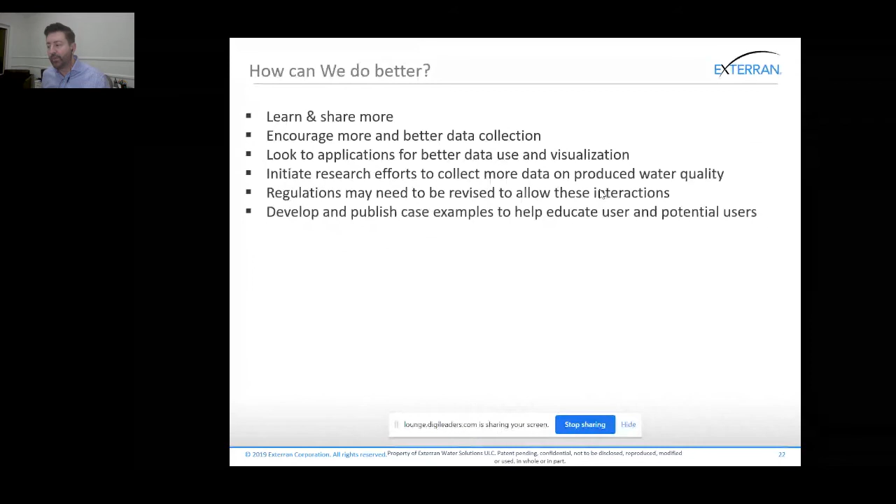Thank you, Steve. That's a very effective presentation, precise and straight to the point. I think that is a massive takeaway: the focal point reverberating across the African oil and gas space is that produced water is not a waste, it's an asset.

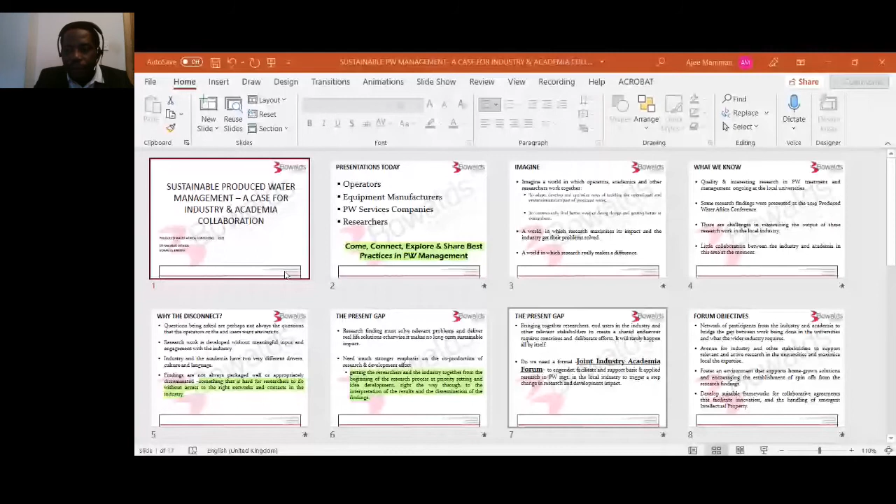So I'll be talking about sustainable produced water management, making a case for industry and academia collaboration. A lot has been said about sustainability, and Steve alluded to the fact that not one person or one group can do it alone. So there is an increasing need for collaboration between industry and academia.

From most of the presentations today, we've heard from operators with their own experiences, and there are obviously operators in the background listening, being part of this. We've got equipment manufacturers, produced water services companies, and researchers who have made presentations here and are also listening. We believe the Produced Water Africa event gives all of us the opportunity to connect, to explore, and, like Steve mentioned, to share best practices so we can learn from one another's successes and failures, and make improvements where necessary.

So I want us to imagine a world in which operators, academics, and other researchers tend to work together, where they adapt and develop and find ways of tackling issues around water management in the oil and gas industry, where research is not done in isolation, but where we try to maximize its impact and help the industry get their problems solved. A world in which research really makes a difference, not just constrained to the four walls of universities or research institutes.

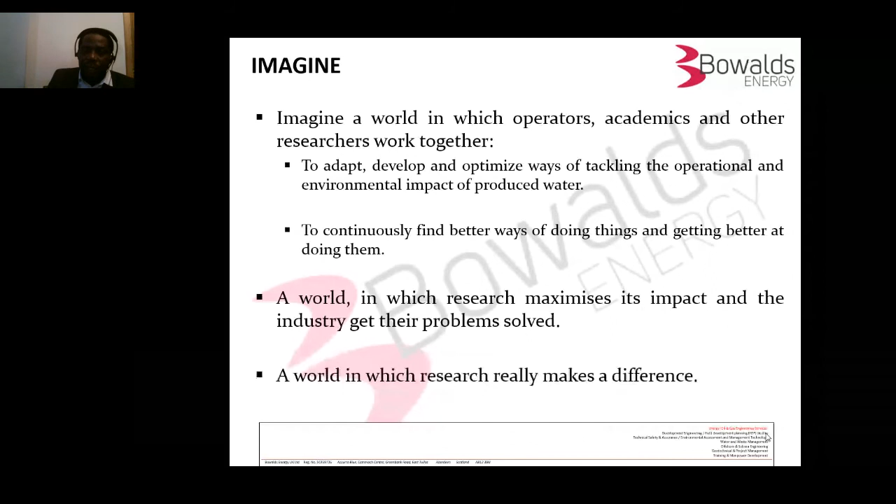So what we know and found out from the 2019 event is that there's a lot of quality and interesting research being carried out in produced water treatment and management in the local universities in Nigeria. Some of these papers were presented at the 2019 conference.

However, what we found out after the 2019 event is that there are a lot of challenges in maximizing the output of this research work in the local industry. There seems to be little or no active collaboration between the industry and academia in this area at the moment, so we're hoping to use this platform to engender that kind of dialogue, collaboration, and networking.

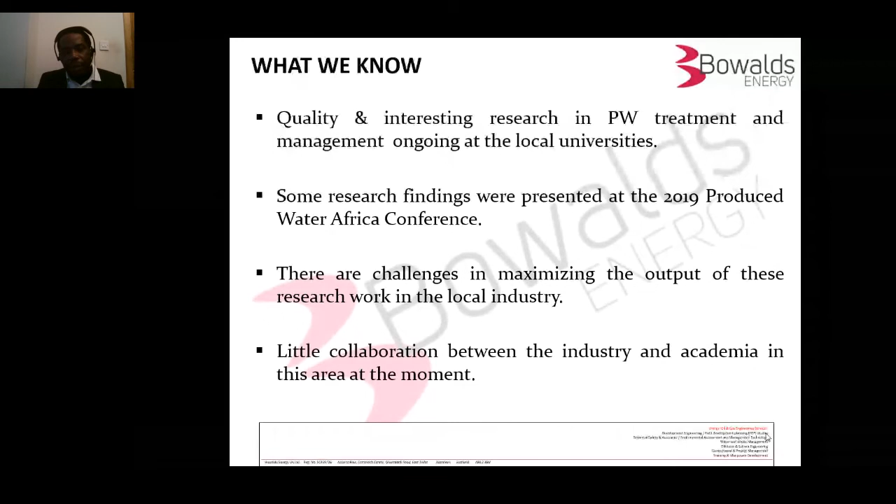So the question is, why the disconnect? Why is it that a lot of people are doing work in universities or local research institutes, and the industry is doing their own bit, and no one seems to be talking closely with each other?

One of the things we found out post-2019 is that probably one of the reasons is that the questions being asked are perhaps not the questions that the operators or end users want answers to. So we've got researchers and academics working on produced water treatment and all it involves, but without actually engaging with the industry or getting their input in developing and building up this research work.

The other thing we've noticed is that there seems to be two different cultures and drivers. Most of the time the academics want to nail the study down to the nth degree, whereas the industry wants a solution now and today.

And the last thing is that some of these findings or research work, which are obviously very good work being done, are not actually packaged well or properly disseminated to let people know what is happening. And we find that sometimes this is hard for researchers to do without access to the right networks and contacts with the industry.

Which is why we believe that having a forum like this gives researchers, other stakeholders, operators, and equipment manufacturers the opportunity to actually engage and network with other people.

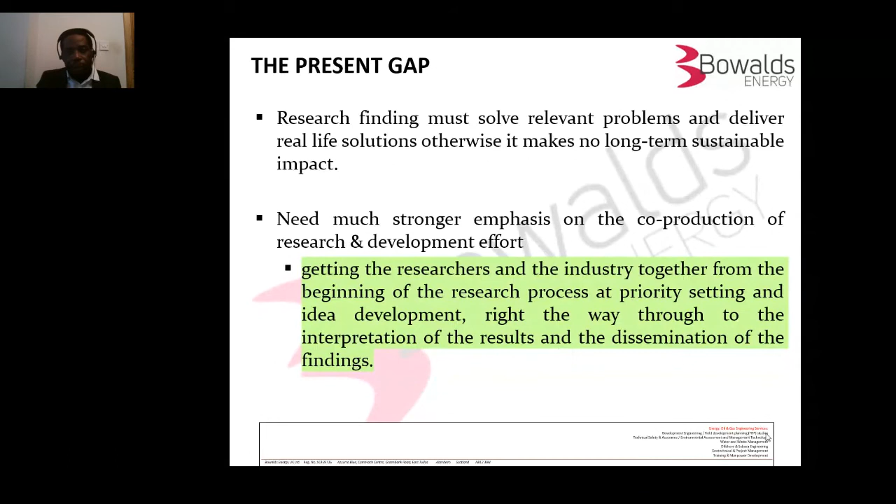And obviously we do know that trying to bring together different stakeholders, researchers, and end users to create a shared endeavor requires being conscious and deliberate. It wouldn't just happen on its own - it needs structure.

So the question I want to put to the equipment manufacturers, the operators, and the academics on the forum is: do we need a formal joint industry-academia forum to engender, facilitate, and support this kind of work in the local industry, which would then trigger a step change in research and development impact?

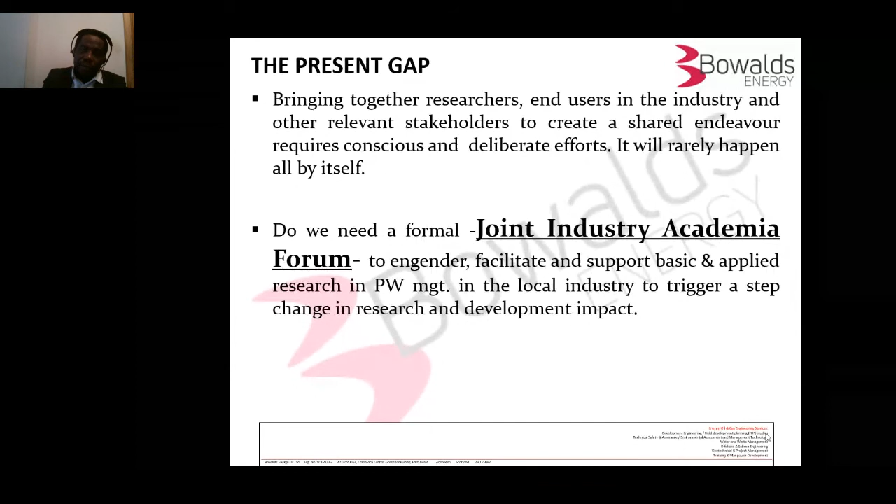So having such a forum, I've tried here to highlight or identify what might be the objectives of such a forum. One, it would be to create a network of participants from the industry and academia.

Provide an avenue for industry and other stakeholders to support relevant and active research in this area, and in doing so, maximize the local expertise. It also hopes to build more local capacity in produced water management.

It will help foster an environment that supports homegrown solutions, not totally dependent on foreign companies to bring in these solutions, but where we can find homegrown solutions. And hopefully via this forum, encourage the establishment of spin-off companies from some of these research findings.

A lot of this innovative work is being sold to us from the developed world, kind of spin-off from work being done in the universities that becomes commercialized. So hopefully with this kind of forum, you can have homegrown solutions, encourage spin-offs of small companies, and create more jobs for a whole lot of people.

And also help to develop a suitable framework where there's a collaborative agreement that facilitates innovation and the handling of any intellectual property that might arise from this.

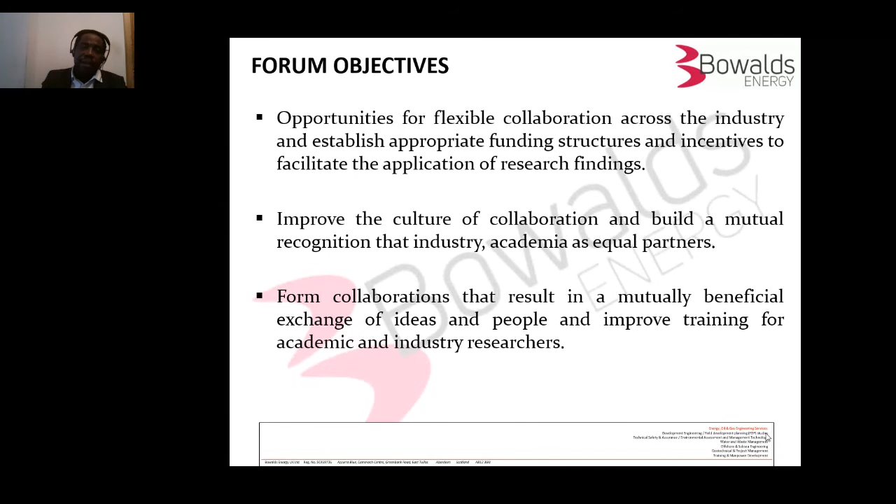Because more often than not, what is being done in the four walls of the universities or research institutes are limited by funding. The basic research is being done, but how do we then apply it in real life? That requires additional resources, which more often than not is not available to these institutions. So hoping that from this forum, there'll be resources and funding available.

And for the industry, they will gain greater availability of early research findings, applications, and adaptation of this research work locally. So it will encourage homegrown technical solutions and then less reliance on foreign expertise.

Finally, it will breed a culture of collaboration and will build the profile and reputation of our universities, thereby attracting and embedding high quality research. So it gives opportunity for our researchers to actually network with other people in other parts of the world doing similar work.

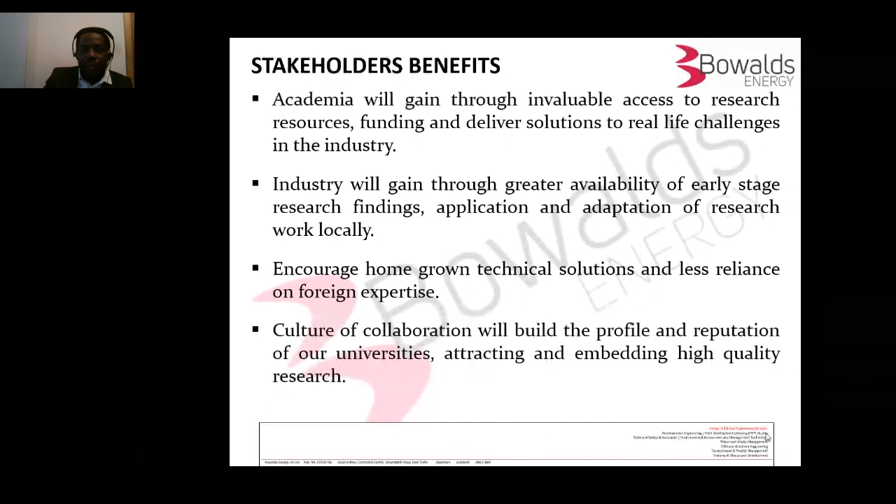So who could be in this kind of forum? We're looking at probably researchers, universities, or similar bodies. Obviously we need the active support from the local industry, the relevant government agencies. We need the OEMs and service companies. We need international experts and bodies such as the Produced Water Society or Produced Water Africa, and a lot of other organizations that could be involved in this to make it happen.

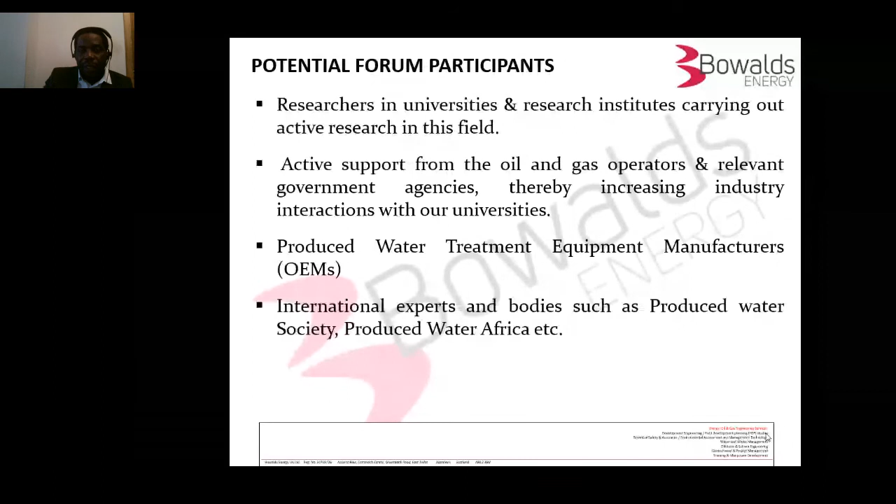So that comes to the issue of, like I mentioned earlier on, this type of forum requires to be funded. And so that's an issue that needs to be addressed. But I'm envisaging a scenario where the local industry and other relevant agencies will provide the necessary funding to set up and run such a forum.

This will ensure that the academics are supported to engage in basic and applied research, often in partnership with other researchers as well, and also supporting graduate research work in our universities. So we actually have our graduate students dealing with real life problems. But this requires the funding and the necessary resources to be put in place.

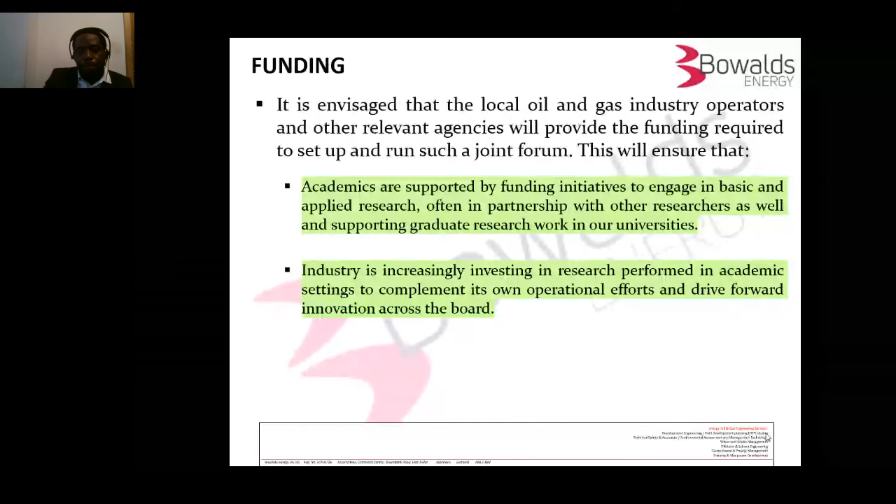So how do we move forward from here? I've just tried to put together what my thoughts are on this. A tentative roadmap would be: let's identify a team of academicians and researchers doing active work in this area of produced water or water treatment in general.

We could identify one or two local universities where this active research work could be domiciled and become centers of excellence in this. I know there's some work ongoing in Nigeria around this direction. We then identify and engage with local operators and other end users that could fund and support this work, as well as relevant government agencies, and engagement with other international experts and organizations to support such a forum.

Just recently, I know that Veolia, one of the oil services equipment manufacturers and service providers, signed an agreement with an MOU with a Ghanaian university to test the deconcentrated effluent water in the mine water management system. So these are good examples of what can be attained or what is possible if there's a commitment and a determination to make it happen.

So this shows a very good example of what is possible, where the industry and the academic world actually come together and make things happen.

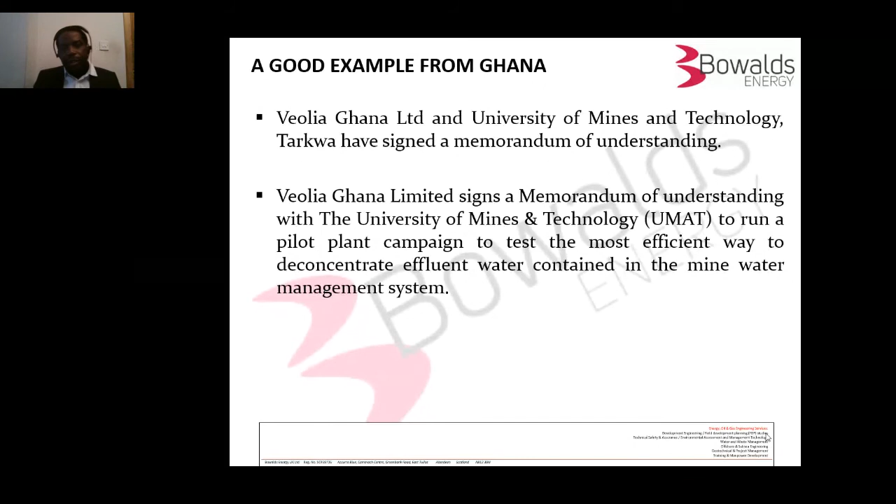Lastly, I just want to say we should not limit the conversations today to just the forum, the chat. We should take these conversations outside this event, network and communicate with each other, and say we are open to suggestions and ideas on whether this sounds like a good idea, whether this sounds like a forum that people want to be involved in. Hopefully we'll see you all in Lagos in 2022 for the third event. Thank you.

Thank you very much, Dr. Magnus, that's an amazing presentation. I think some of your topics came up from some of the forums that I was in, and we actually had this discussion come up in some of our presentations earlier today, and we had the privilege to discuss it.

I have a few questions here for you, Dr. Magnus. One is from Kingsley: you said in addressing the present gap, service companies want research focused on real life problems, i.e. reducing the concentration of toxic pollutants. Why is it difficult getting real life products?

I don't quite understand the question, but I'll try to answer it as best as I can. What I mean is that from the 2019 event, we had a lot of good technical papers potentially looking at how we can utilize some of the local materials to replace some of the ones we imported, in terms of filtration, looking at walnut filters. I mean, what do you call it... part of it just escaped my mind.